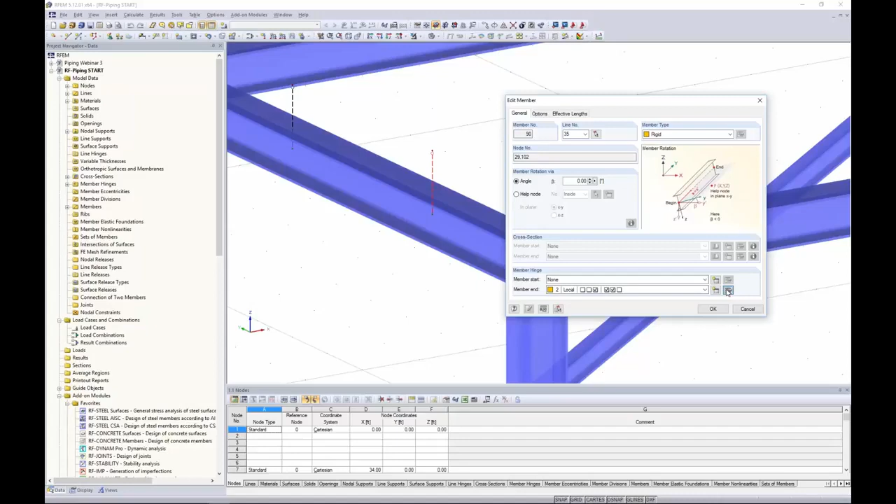What I did was add a member hinge to the rigid link here to release translation in the global X direction, so that will allow those pipes to slide back and forth in that direction. I also released the moment, since I didn't want any moment transfer between our piping members and the supporting structure, so we can do so with the member hinge on our rigid links.

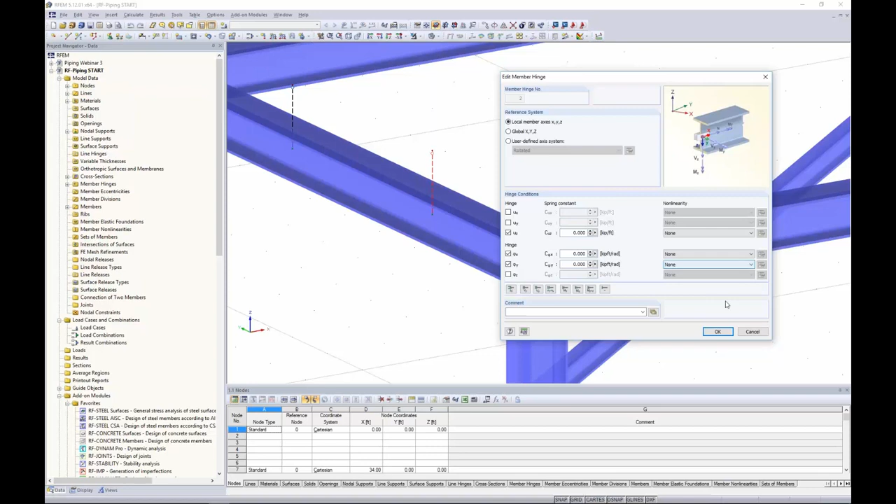Now, taking a look at the rest of the structure, these are just typical W shapes. We can use our project navigator over here on the left to view all of the input data. For example, in the cross sections tree, we can see that the W8x35s are defined for most of our members within this pipe rack. We also have some diagonal vertical bracing, W4x13s. So that's really all that I've done so far.

Now, when you go to create a new model within RFEM, or after you've created the model as I have, we need to go back into the general data. What we would do is right-click on our model name, go into the general data, and under the options tab you'll notice piping analysis. This option is only available if you've purchased the RF piping module extension. So here we will check this checkbox, and under the details are some additional settings that we need to define.

The first one is to define which standard we'd like to use. We have the ASME B31.1, 31.3, and recently added is the Euro code. This option down below, this checkbox, is for welded forged T and welded in contour inserts. This just refers to a couple of variables, RX and TC, that we won't be using today, but keep that in mind if you are using those types of components.

The default branch connection type will make a little bit more sense later on. For right now, we just want to set this to reinforced fabricated tee, but keep in mind that this setting is here, and I'll mention it later on.

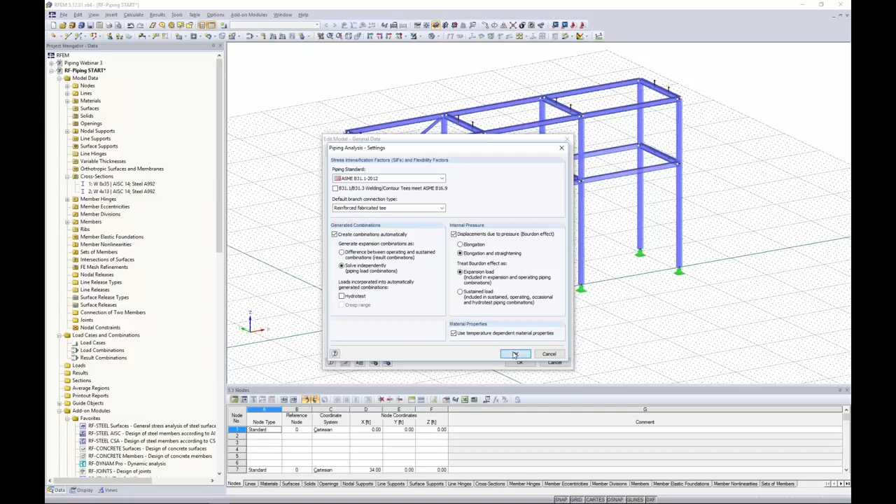When I click OK out of these dialog boxes, you'll notice I'm still within RFEM, but now I have some additional tools available to me for modeling piping systems.

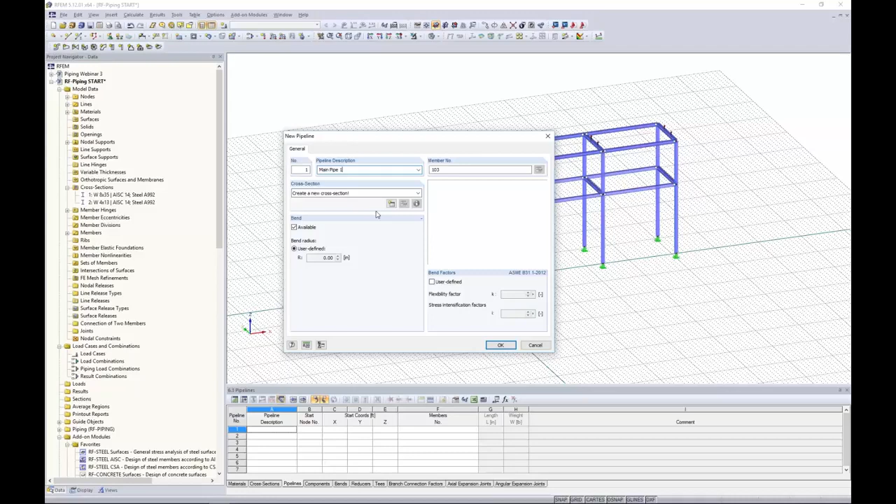We want to begin today by drawing a new pipeline, using this first tool available in our new toolbar. For the pipeline description, we'll call this one main pipe 1, and we need to define a cross section. With the cross-section, we will go into our database, and up pop several different manufacturers and standards.

You'll notice that we have the ASME B31.1. We have NPS and DN. NPS is going to be related to imperial units. DN is going to be related to metric.

For our first pipe, I want to scroll down to my 8-inch diameter, specifically 8.625, and the thickness of the wall is going to be 0.594. So I can see my cross-section populated here. If I have any questions about what variables are being used for my cross-section properties, I can open up this info box to see everything listed.

The material is also defined within the same dialog box. Here we will open up our material database. Over on the left we have some filters where we can filter down to the ASME B31.1. These are all the materials listed in Appendix A within the ASME standard, which is quite complete. For today, we will just stick with A53 grade A, and here are all my material properties.

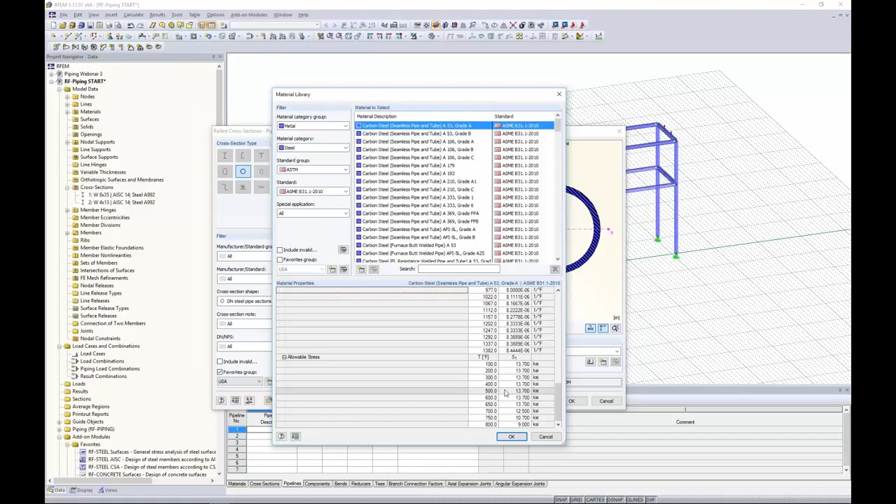This is what I mentioned previously, that as our temperatures are changing, so are our dependent properties such as modulus of elasticity, thermal expansion, and allowable stress. These will actually change with each iteration as long as the temperature continues to change as well.

Now that we have fully defined our cross-section and our material, both listed in that dialog box we were previously in, the line mass here is nothing more than the density of our material multiplied by the cross-sectional area of our pipe to give us our mass per unit length. The total line mass is correlated here with the line mass we've defined so far, but you'll see this begins to change as we define some additional parameters with these other tabs up here at the top.

Design data is important because it relates to our pipe wall thickness checks and pressure checks according to the ASME later on. So we want to initially give some design data here that we plan to design this pipe to. For example, if we plan to use a pressure no greater than 500 psi, and maybe design around 85 degrees Fahrenheit, nothing too hot or extreme here.

The second tab is the bend. You can actually create a different cross-section for the bend of the pipeline than the straight pipe. This is important for things like thermal temperatures, which create much higher stresses at a bend. So if we wanted to change this cross-section to a thicker wall, we can do so. The rest of these parameters line up with what we saw in the straight pipe tab.

Layers. We can include layers such as insulation, plating, and lining. For today, we'll stick with applying an insulation. What we'd want to do here is to define the weight of the insulation as 6.37 pounds per cubic foot, as well as the thickness. So we'll add 2 inches of insulation to the outside of this particular cross section.

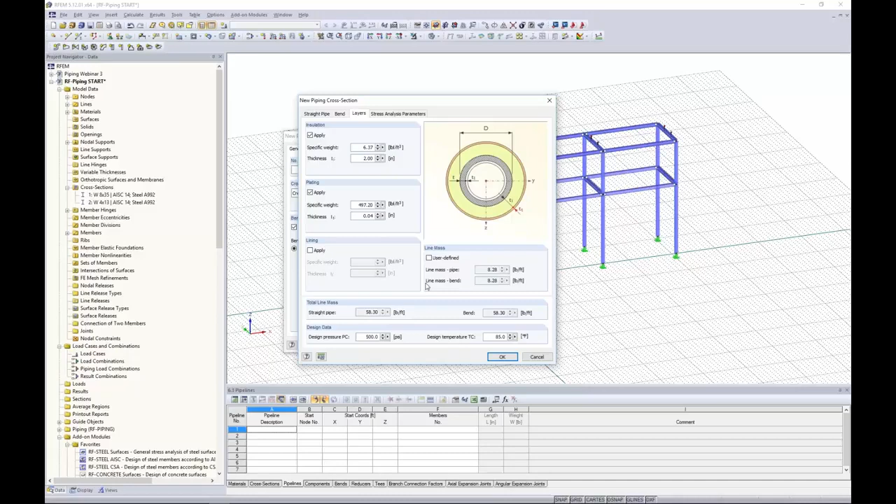We'll also add some plating. For this, the specific weight needs to be quite a bit higher at 497.2, just something that we're given from the manufacturer, and a thickness of 0.04 inches. Now you'll start to see this total line mass increase from what we saw with the first tab.

Stress analysis parameters, well, here you can see there's corrosion allowances, mill tolerances, manufacturing allowances, and welding factors. This is important for when we're checking the pipe wall thickness according to the ASME. There are some default settings in here, but by all means, you have control to override those for both the straight pipe and the bend.

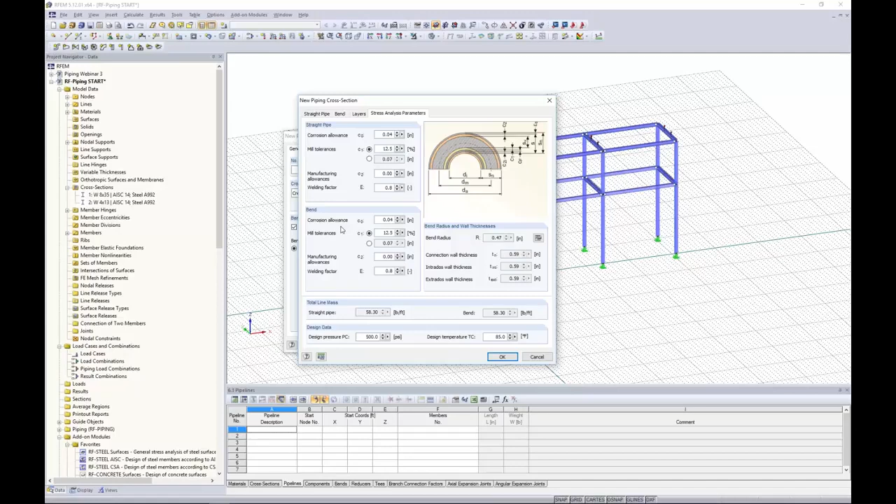Now I can click OK, so we're back to our original dialog box. So we define all the properties for our cross section. Now you'll also notice that we have bend available here. What this means is that as I begin to draw my pipeline back here in RFEM, I can actually automatically create the geometry for the bends.

So right now we have it set to the long radius. The bend radius is set to 12 inches. We can change this to short and use 8 inches, or we can choose a user-defined radius here.

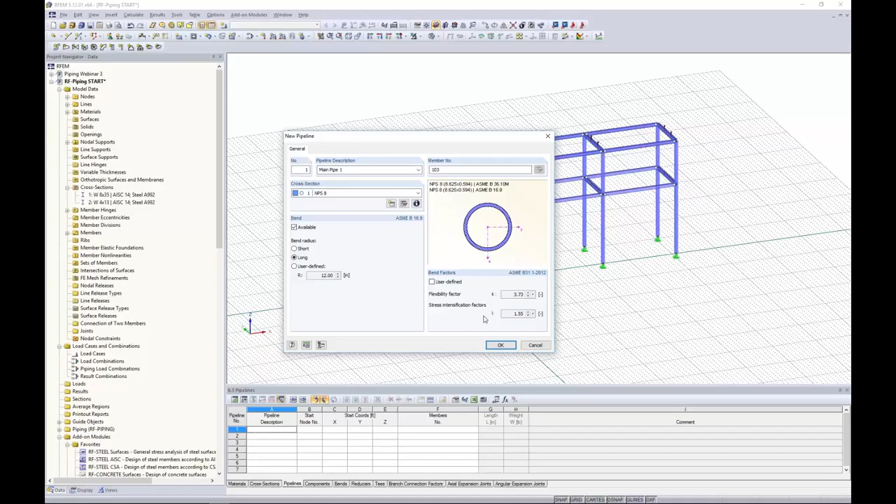The bend factors are calculated from the ASME. The flexibility factor has influence on the bending stiffness of the pipe bend. The stress intensification factor is something that will be used for design later on in our add-on module RF piping design. Again, you can override these with user defined as well.

So now that we have defined everything for our first piping member, what we want to do is to begin drawing it. You'll notice I have these crosshairs available in my graphical interface. What I'd like to do initially is to change the drawing grid around a little bit. So I'm first going to change the plane, and then I can easily select a different origin here. I'm going to snap to the top of this rigid link here.

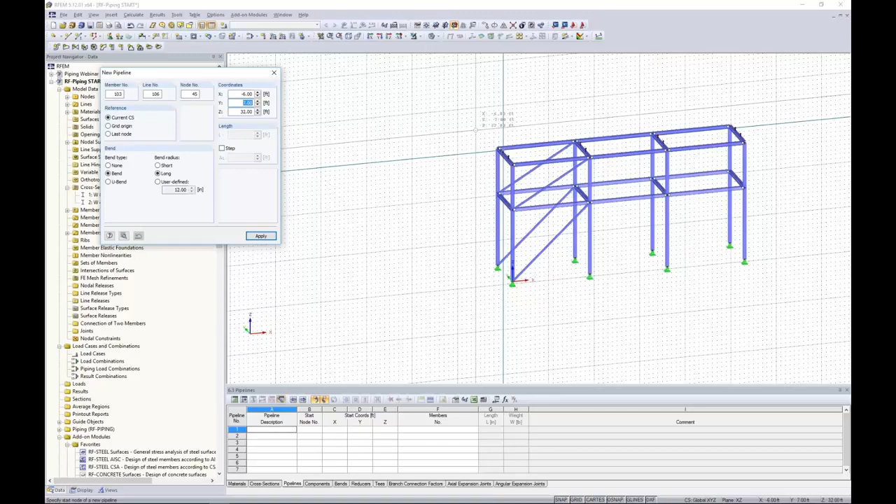So when I go to draw a pipeline, I have a few options. I can choose the current coordinate system, which is what I'm going to do. That will just leave this grid as it is. I can also choose a grid origin or the last node. The last node will dynamically change according to the clicks I make in my model as I begin to draw this pipeline.

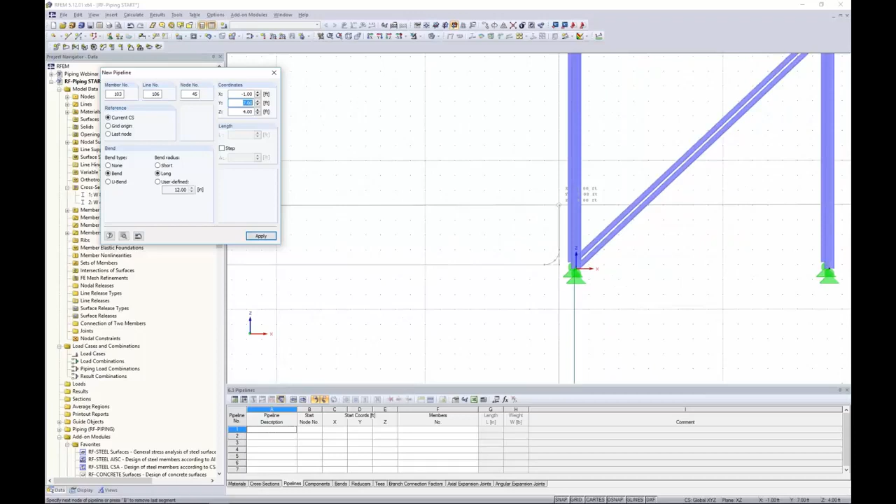So we go all the way up to the top, and we can begin drawing the pipe across the top of the supporting structure. Now, keep in mind that this drawing grid keeps me in one plane, so I don't have to worry about flying off into space anywhere.

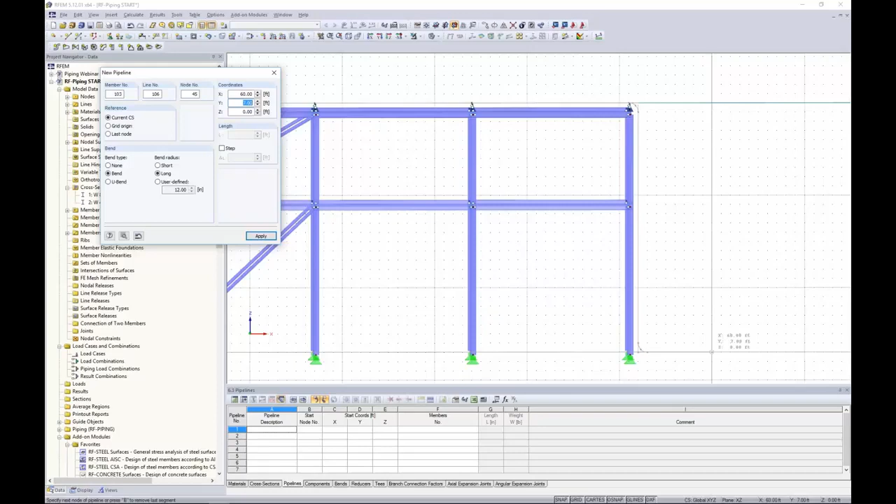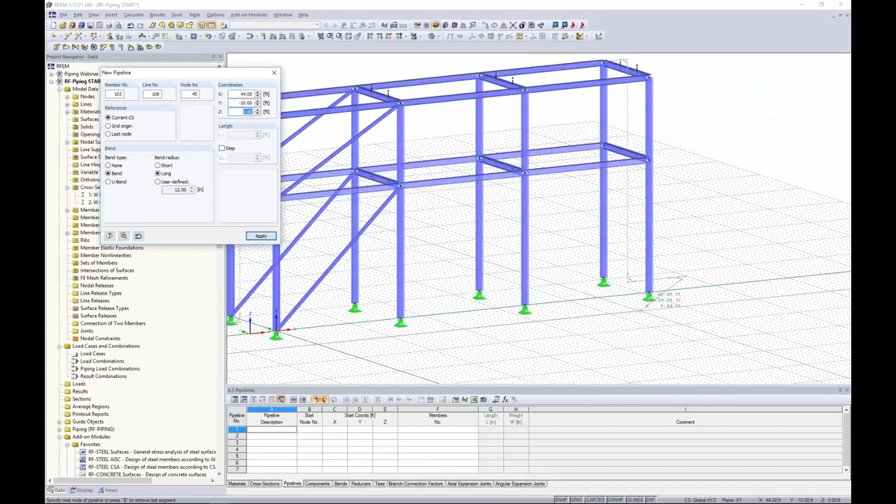Now, when we get to this point over here, what I'd like to take into account is maybe some additional bends to dissipate my heat from my temperature loads. So all while I'm still drawing this same pipeline, I can change my drawing grid back to the XY plane. Maybe I snap back to the bottom of my supporting structure. Then I can zoom in and continue modeling my pipeline here with some additional bends.

So once we are done with this, I will make my last final click here, and we'll snap to a point and right click to finish it. And now my piping is complete. So you can see that if everything goes well, you should have the name of your pipe here called main pipe 1. That's the description that we gave it.

Now I want to create an adjacent pipe right next to it, and utilizing some of the features within RFEM to make our life a little bit easier, what I'm going to do is to turn this into a wireframe display model. Now I'm going to highlight my important nodes here, the nodes where the bends occur, by holding down my control key and selecting all of these main nodes where the pipe makes some bends.

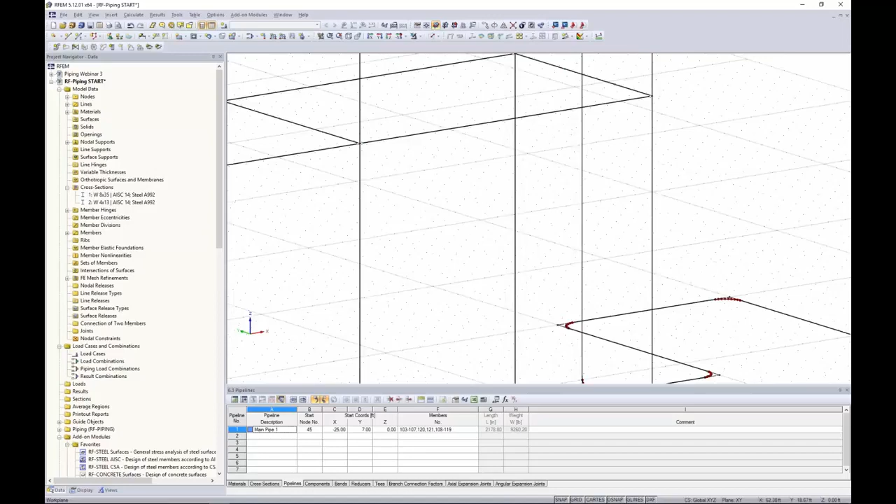So once I have these selected, what I can do is use my Move Copy tool. I'll create one copy and move it -4 feet in the global Y direction. I click OK, and now you'll see those copied nodes are available here.

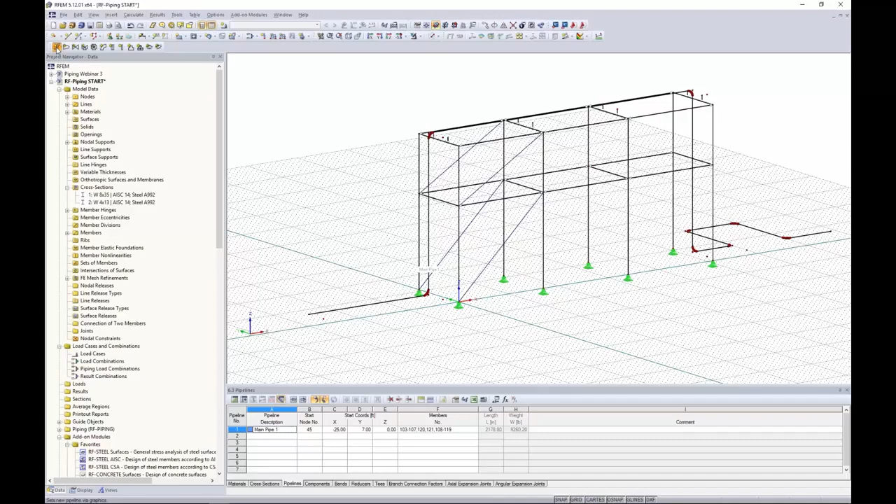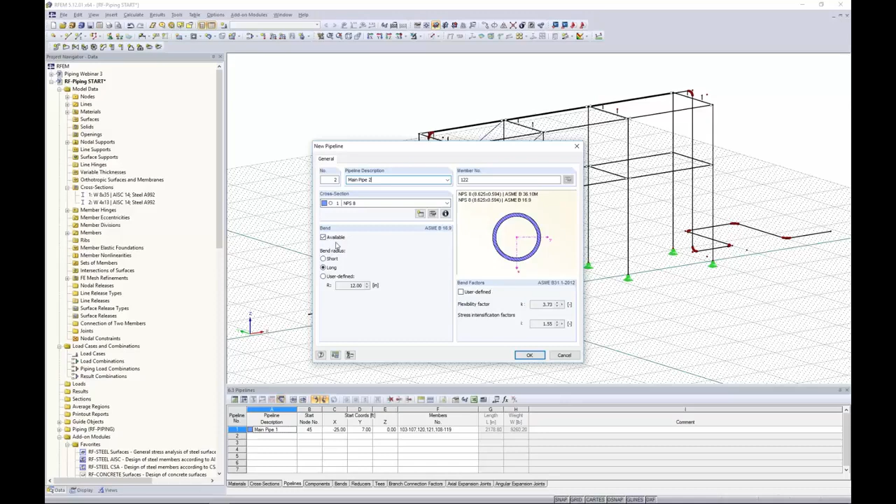Nothing too special. So what I'm going to do is create a new pipeline, and once again, this time we'll call it main pipe 2. Now the cross section, I've already defined that 8-inch diameter pipe with all the insulation and cladding. That's now available for all my pipelines to use in this model, so I want to use that same cross section so I don't need to redefine anything. I'll use the same bend as well, and I can click OK.

So the reason that I created those nodes now is that I can easily just snap to those nodes here without having to change around my work plane like what I did previously. So again, just using some of those special features that we have in RFEM to make modeling a little bit quicker, and I right-click to make my last point.

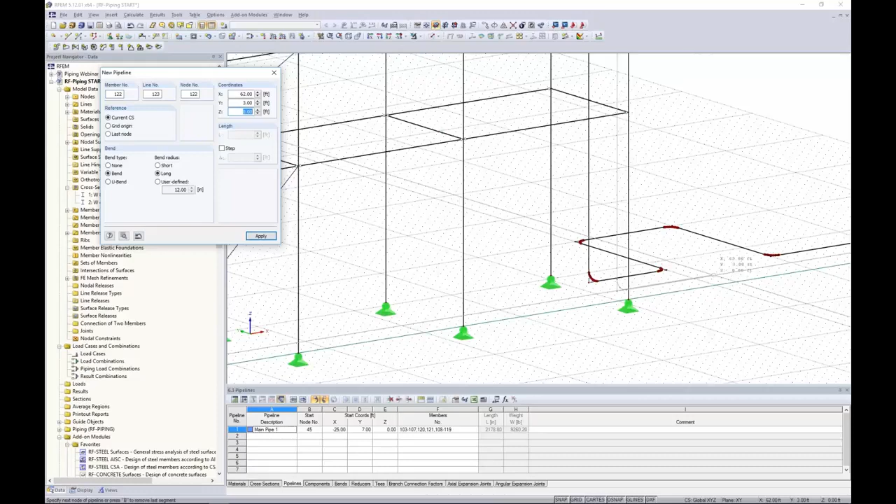Now, if I turn this back into rendered view, let's say, oh okay, well this pipe really would like to extend out a little bit further than what I have shown. Well, instead of redrawing everything, what I can do is take this node and simply drag and drop it so that it's adjacent to my main pipe 1. And again, everything went well.

We see the name of main pipe 2 here. Now the pipes are kind of blending into the rest of the structure, don't really tell what's going on here. Well, under the Display tab in the Project Navigator, this controls everything that we view graphically, whether that's input data or our results we'll see a little bit later on. But if I scroll all the way to the bottom, I have this option here to change my colors and my graphic according to, right now it's just set to the standard.

We can choose material, cross-section, but we also have pipelines. So when I choose that option, my panel pops up and shows me exactly what my main pipe 1 and main pipe 2 are with different colors, so it sets them apart from the rest of the supporting structure.

Okay, so what I'd like to continue to do is draw in a couple of straight pipe members, just short segments that frame into this main pipe 1 so we have some intersections. I'm going to go back to new pipeline, and we'll just call this one pipe 1.

And I want to define a new cross-section here. So up pops our cross-section database. Now, you'll notice that, of course, we can go back in and filter through this long list. We also can create a favorites group. By activating my favorites group, I've edited it so that I've just added the 2 cross-sections that I'm using in today's webinar. But you can imagine that if you use a handful of cross-sections quite often, this is a great way to just quickly select them.

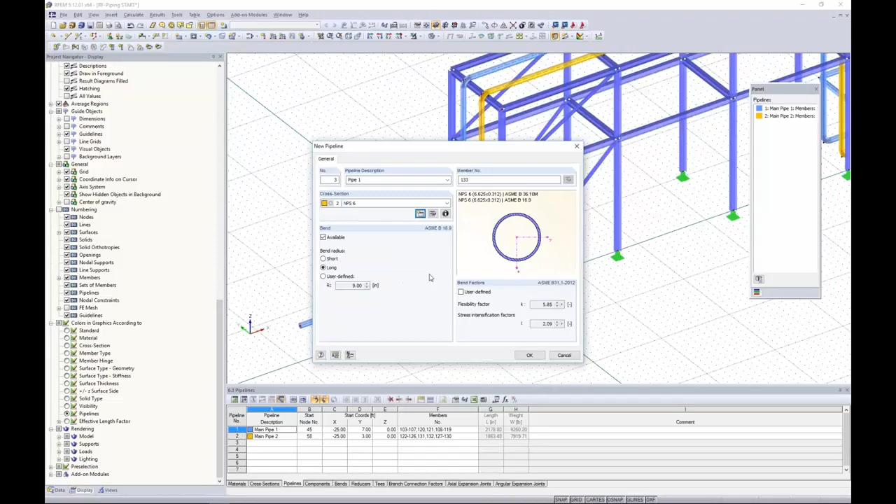So I click OK once more, and I think easiest is to change this to my current coordinate system and to change this to wireframe view. So that way I can zoom in here, and my first point I'd like to choose is -1570. And then all I need to do is snap to a point which extends out. I right click. That's my first pipe.

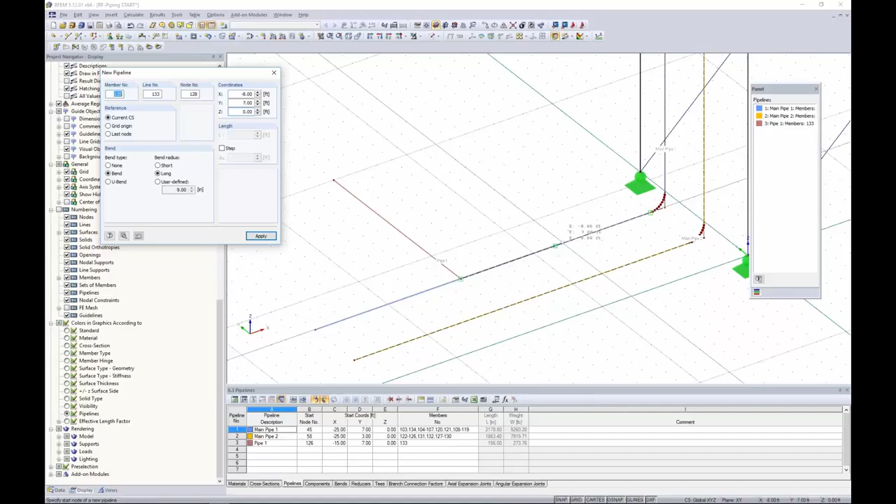Creating once more a new pipeline, we'll call this one pipe 2. I've defined that smaller section, so I always have that available in this particular model. I click OK, and then I can again change this to current coordinate system, that's what I prefer to work with. Here we'll choose -870 and snap to a point out here, right click.

Showing the rendered view, we now see those additional pipe sections shown here, and everything is colored differently so we can tell it apart. Okay, so now that I have modeled my pipelines, let's move on to the piping components. That was where the rest of these tools will come into play.

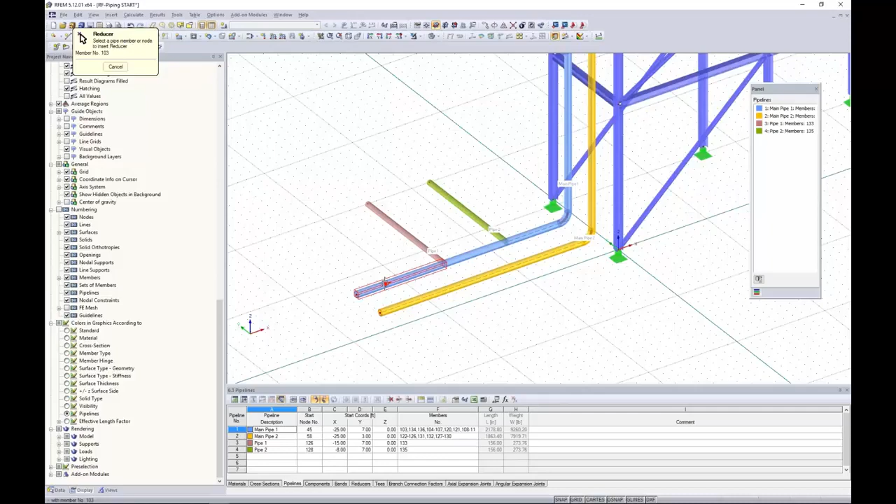So the first thing that we want to define is a new reducer. So when I click on new reducer, the program requires me to click on the pipe that I'm going to apply this reducer to. So I click on this first pipe section here. Now reducers are used to transition from a larger pipe to a smaller pipe or vice versa.

Within this dialog box, the first thing I need to define is which dimension to change, towards which node. This is actually the opposite of what I want to do right now, so I'll click on my beginning node here. You'll notice my reducer start, I can choose that smaller cross section we've already defined, or create a new section.

The reducer end is grayed out because this will transition into the pipe I already have defined. What I do need to define is where this reducer starts, so we'll start at about 48 inches from the start, and you'll notice this big red arrow pops up exactly on the pipe where we're going to apply this reducer.

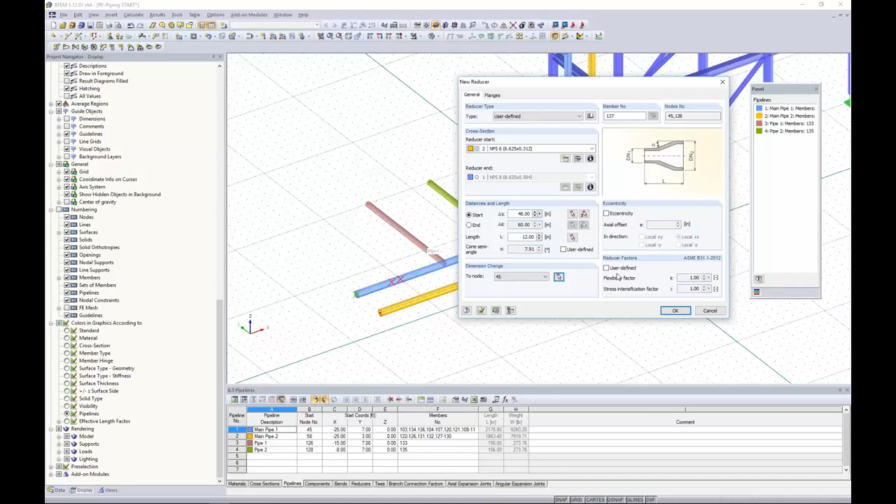The length can also be applied at 12 inches, and there's our second red arrow showing where the reducer end is. You can also define an eccentricity here, which would be useful if you want the bottom of the pipes to be flush. In our case it doesn't matter, so we'll keep this as is. Again, the reducer factors can be overwritten here if you'd like.

For a lot of these components we do have a library, but unfortunately this library is more relevant to Eurocodes and European manufacturers. We plan to implement some US manufacturers in the near future, but for now it's easy enough to just set this as user defined. For flanges, this is where maybe we would weld flanges to our pipe and bolt them together at this reducer location. I'm not going to apply flanges now, but we'll do this plenty more times with other components today, so that'll be more clear in a minute.

And I click OK. Now if we zoom in, we can automatically see that reducer applied here with the smaller pipe section on the left.

Moving on down our list here, we have three options for valves: a two-way valve, a three-way valve, and a four-way valve. Pretty self-explanatory - a two-way valve is used for two pipes connecting together, a three-way valve would be an intersection of three pipes, and a four-way valve of four pipes.

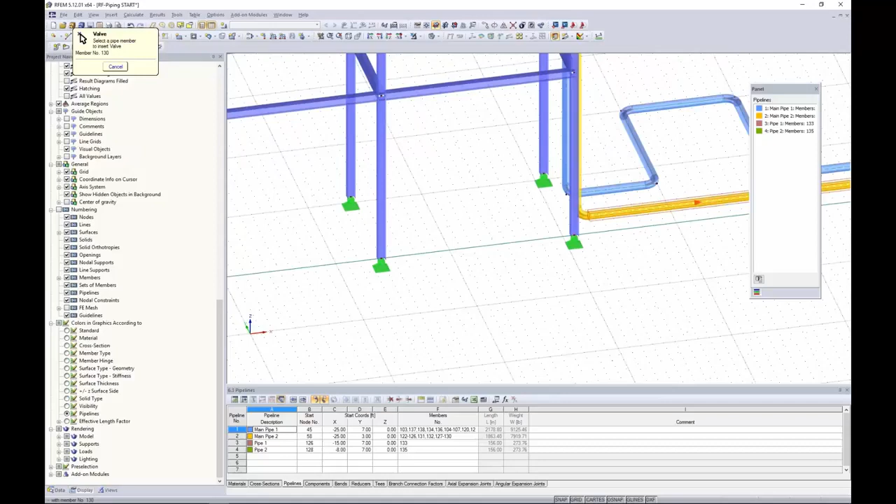Starting off with our new valve, just two-way, we're going to move to the other side of our model, in particular main pipe 2, and select this pipe here. Up pops our dialog box for a new valve. We just want to specify where this begins, so we'll start at 12 inches from the member start, indicated by my red arrow here.

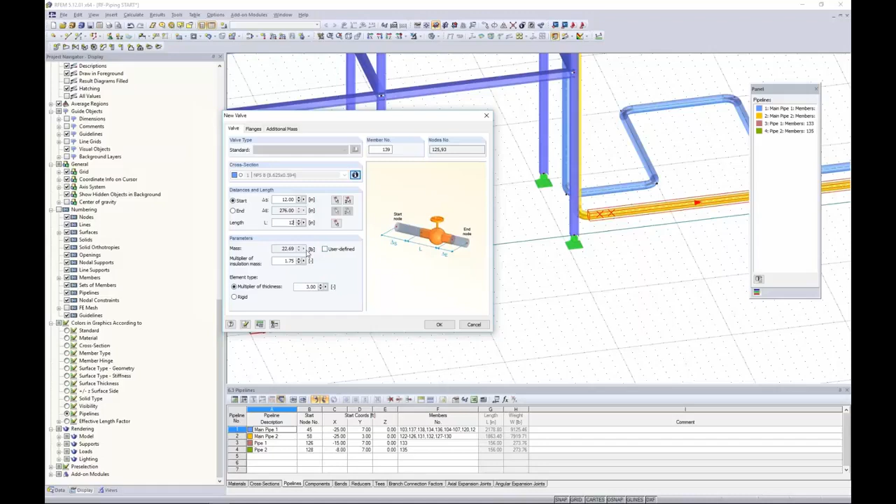The length will be 12 inches, and we have some parameters here automatically created, such as the multiplier of the insulation mass set to 1.75, and the multiplier of thickness set to 3. You can override those, which ultimately affects our mass here, or you can set a user-defined mass as well.

The flanges - this is where maybe I do want to apply some flanges. We're going to plan to weld those flanges to both the valve and the pipes and bolt them together. For our flanges, we want to check the checkbox that those are both available.

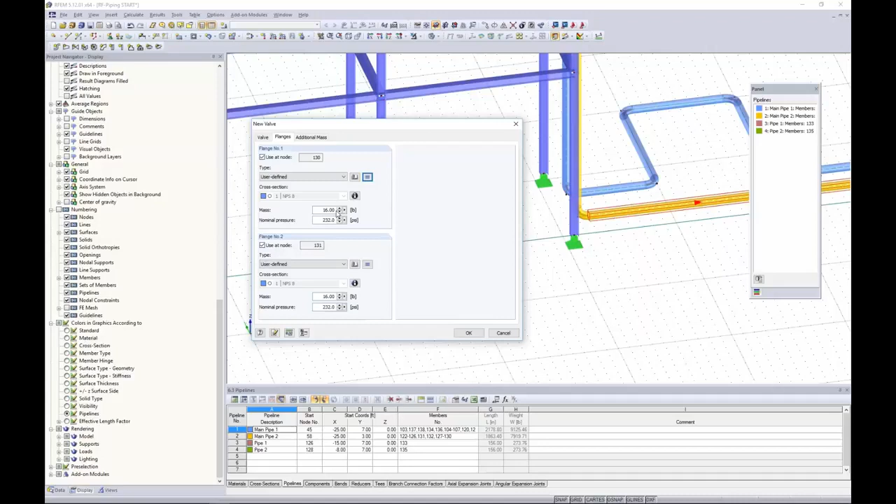Our nodes are automatically generated here of where that flange is going to occur, and we can simply define the mass here of our flange as 16 pounds, and maybe the nominal pressure is 232 - again, this is just information we'd get from a manufacturer. What's also nice is I don't have to re-enter this information, but I can just set it to all. This will automatically populate the same flange settings for my other node.

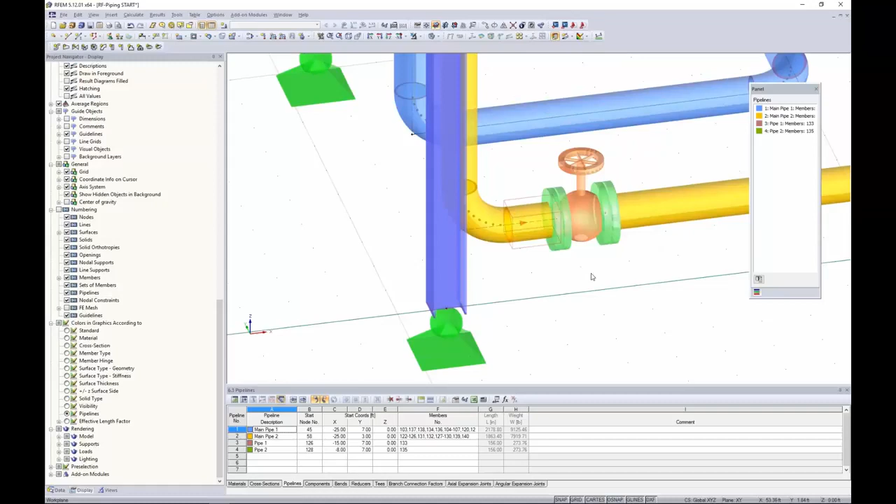The additional mass tab here is useful for our hand wheel if we have additional mass to take into consideration, as well as the eccentricity away from the original flange. Once I click OK, we can see that flange is automatically created visually here and will be taken into account for stiffness, analysis, and design. So that makes sense for our two-way valve.

Now in a similar sense, we will apply a three-way valve. Instead of selecting a pipe, we have to select an intersection, so I select this first intersection here where we have pipe 1 framing into main pipe 1. The cross sections are automatically generated according to what we've modeled in RFEM, and we want to give it a length for all three piping components here, 12 inches.

Again, our red X indicates where that occurs. Parameters, same thing that we saw within the two-way valve. We have a multiplier of insulation mass, multiplier of thickness. Our flanges here, we do want to create flanges at all locations.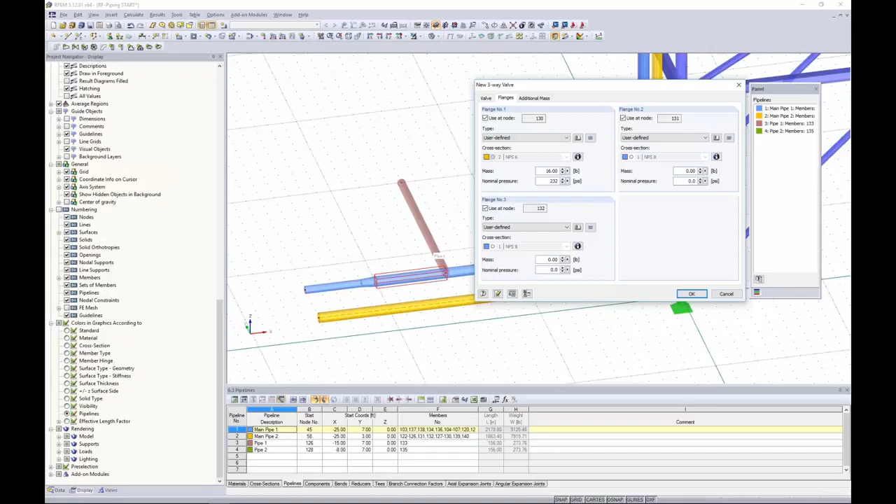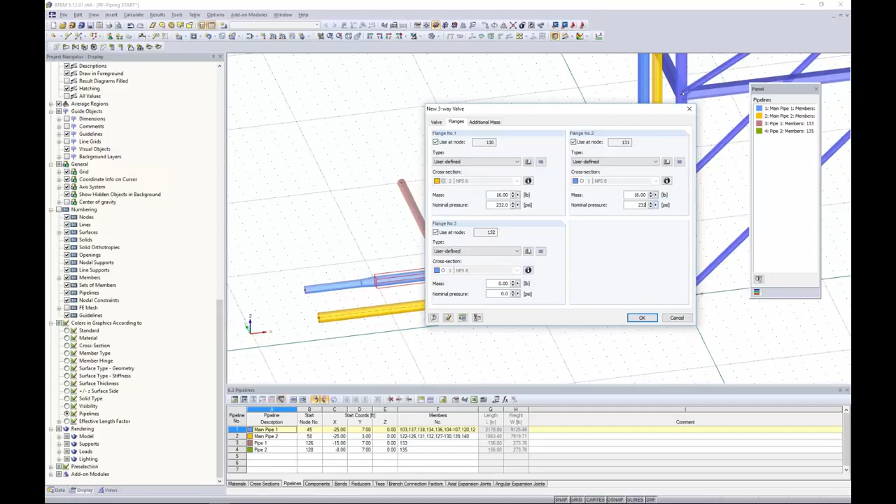Again, this will be 16 pounds, 232 psi. Now, if I try and set this to all, you'll notice that nothing happens for my other two flange entries. The reason why is because we have a different cross-section defined here. The program will only automatically assign the flanges to the same cross sections. So if I move over to my 8-inch diameter pipe and I type in 16 pounds and 232 psi, and I click equals, that will set the flange for the third node automatically.

And again, the additional mass can be considered with the hand wheel here. So once I click OK, then we should see that three-way valve generated graphically. So that's what a three-way intersection would look like.

Now, four-way intersection, same concept. We don't have any intersections of 4 pipes here, so we won't be applying that today.

Right next to that is the new bend. A new bend is useful had I not created to automatically create the bends when I drew in my pipeline. So perhaps these two elements here, these two pipes connected at a 90-degree angle, and I wanted to go back in afterwards to create that bend. You can always do so with the bend tool up here, define the radius, define a different cross section if you'd like as well.

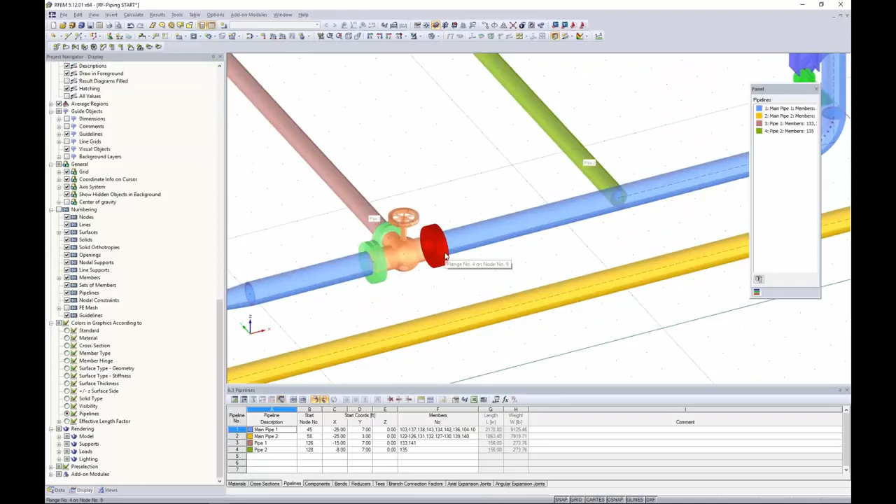Next to that is a new flange. So this has nothing to do with some of these other components, but you can purely apply just a flange to any segment of a pipe. This might be useful if you have 2 extremely long pipes and you would like to add in a break there and they're bolted together with a flange. You can do so by adding in that flange.

We also have a new blind flange. This would be able to block nozzles and piping ends. So for example, we could add a blind flange here at one of our piping ends.

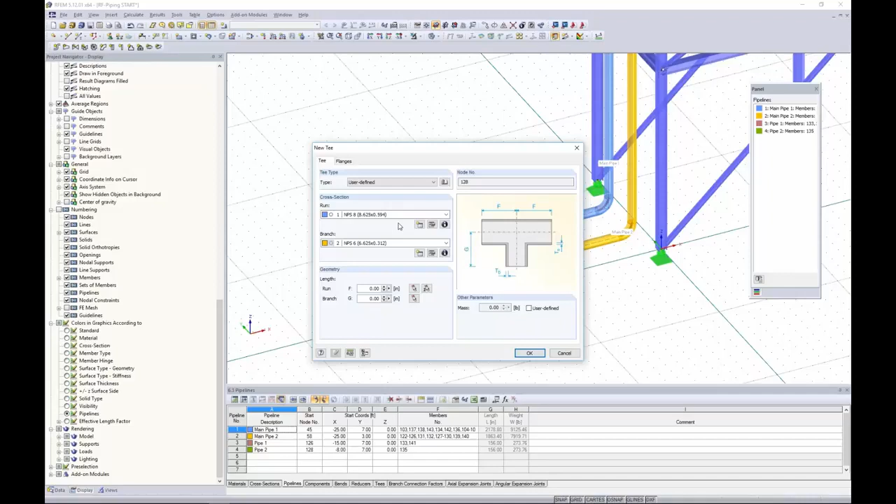A new T. So a new T would be an intersection of 3 pipes, such as what we see here with our pipe number 2. Nothing too fancy with this. We have the cross section defined with the run. The program automatically assumes that's our 8-inch pipe, and the branch is going to be the smaller 6-inch pipe. Then we just simply define the geometry, and again, we can add flanges here.

For our case, instead of doing this, I'm actually going to apply a new branch connection. So again, I click this intersection. Now with the branch connection, remember back in the general data, I said that we had to set a default option for the connection type. Well, that's where this comes into play. So we set the reinforced fabricated T so that automatically when I jump into this dialog box, this is what will always be automated.

Now, if I use something else quite often, then you probably want to go back to the general data and change that default value. You can always come in and individually select them as well. So for us, we're going to choose a reinforced fabricated T.

All of our cross-section dimensions and factors are automatically calculated here, but what we do need to define is the thickness of our reinforcing pad or saddle thickness. So this is important to just give the pipes some additional reinforcement here or thickness at maybe where we have some high stress locations. For today, maybe we put in here a 1/4 inch thick saddle thickness and weld that directly to our pipes. Once that's done, I click OK.

Now this is indicated graphically with just a ball at that intersection. As far as the other 2 options here for axial expansion joints and angular expansion joints, I will get into that later after we do design. So for now, we'll continue to move on.

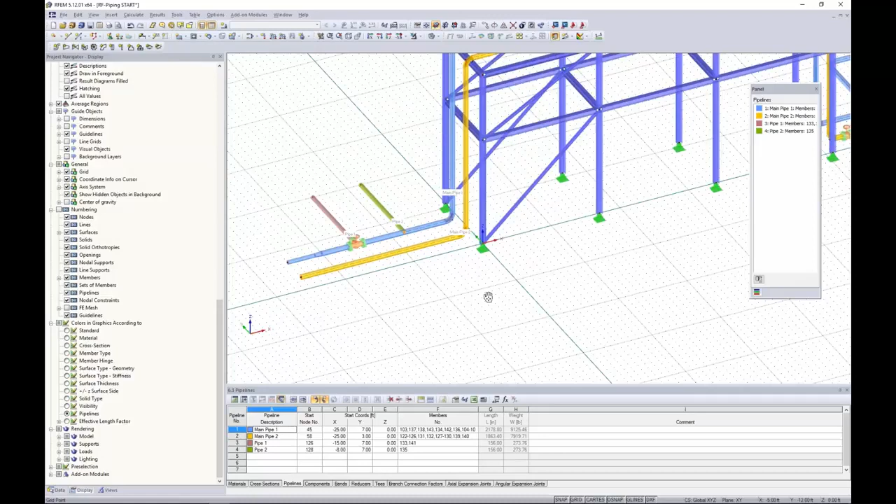So before we can start loading our structure, we need to support it. Just like we support before we begin loading our piping members, we need to support them. So just like we supported our supporting structure here, you can see at the bottom of the columns we have nodal supports. We have to do the exact same thing to our pipe elements. So we don't have any additional features for supporting the pipes. It's just what you would use in RFEM for all the rest of your members as well.

So in our case, we want to create a new nodal support. Now with a nodal support, we have 6 degrees of freedom, 3 degrees in translation, 3 degrees in rotation that we can fully fix or fully release.

We also have a spring constant here. So if you have something that's not fully fixed, not fully released, but somewhere in the middle, you can define a spring constant and you'll have partial fixity.

Lastly, we can define nonlinearities. It's not completely uncommon that for a piping support, you have some type of friction support, dependent on your normal forces. You can define all that with the nonlinear capabilities within the program. I'll repeat this again, but nonlinear supports is something that cannot be taken into account with result combination, so just keep that in mind, but we'll revisit that later.

So for today, we want to use just a typical hinge type application, one of the default options within the program. I click OK. So what I'm going to do here is simply click at the ends of my pipes to support those with that basic nodal support.

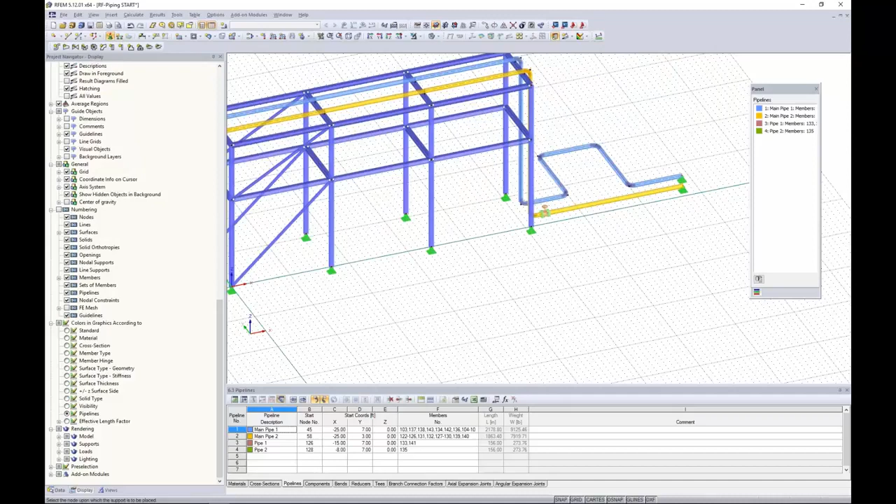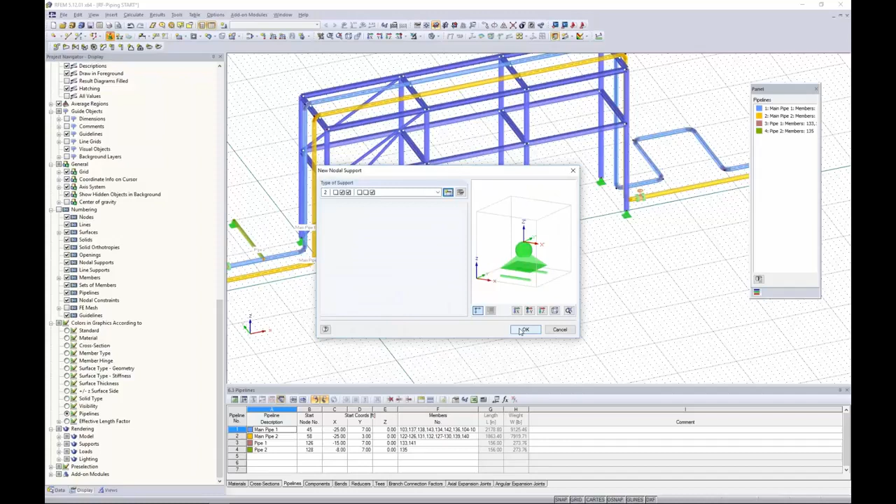In a similar concept, going back to my nodal supports, I'd like to define a new definition. This time I want to fully release it in the X direction, some type of roller support that allows translation in the global X direction. I click OK. So now for this type of support, I'm going to turn this into wireframe view, and I'm going to zoom in here.

These will want to be applied right at the bends of the pipes. Now, I'm not applying it at this node, which kind of indicates where our bend occurs, because this node doesn't technically lie on the piping member. We need to apply it directly on the pipe.

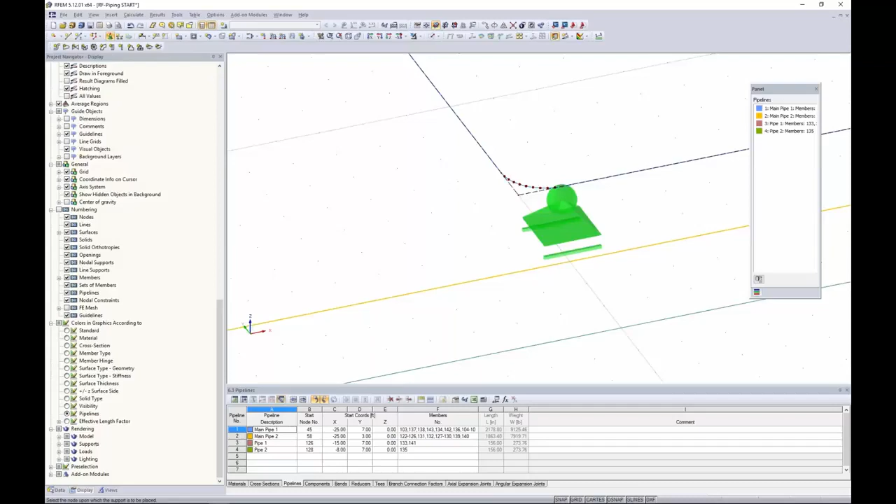So for this, I'm just going to highlight these nodes right at the bends on both sides. And once we've completed the right side of the structure, we'll zoom in to do this on the left side.

Now, once more going back into the nodal support, because I've defined these new nodal supports, I can always select them within my drop-down box here, but I want to create one more definition, and we're going to release this in the global Y direction. So this will allow movement in the global Y as a roller support.

I click OK, and that's where we want to apply this to our pipes up here where we added in these additional bends. Okay, so now our structure, including our pipes, are fully supported.

What I'd like to move on now is loading of the member. So for this, we want to create some additional load cases. I go to add a new load case, and up pops my load cases and combinations dialog box.

Now, for those of us who are familiar with RFEM or just structural design in general, we of course have action categories according to ASCE 7 or the NBC, such as live load, dead load, wind load, and so forth. But when you have the RF piping module activated, you'll notice we have several more action categories available here for our piping load combinations, such as piping self-weight, fluid, pressure, snow, wind, even cold springing, hanger, hot loads, and cold loads.

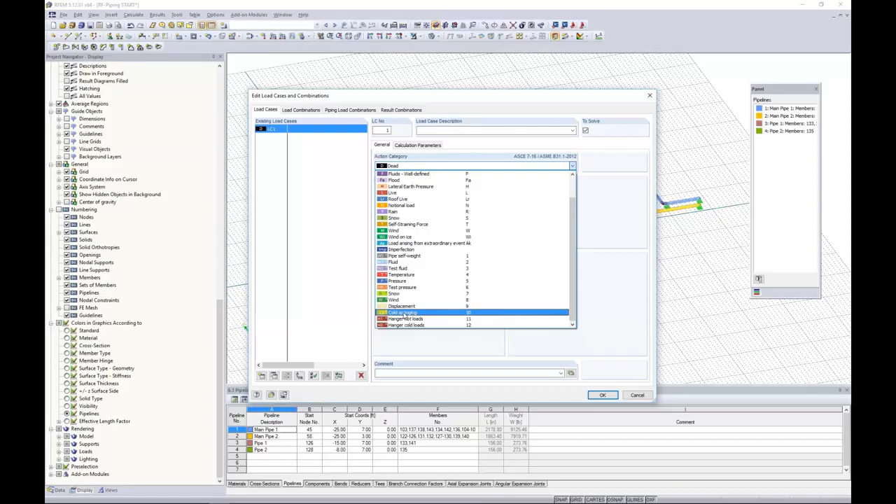So for our first load case, we will define a pipe self-weight. We'll give it the name pipe self-weight. The self-weight will be activated here with this checkbox as -1 in the global Z direction.

Now we create a new load case. We uncheck the self-weight because we don't want to account for that twice. This one will be for fluid, and we'll call this one pipe fluid. We create another load case.

This time we will name this one temperature 1 and assign the appropriate action category. I can make a copy of these as well. So now all I need to do is redefine temp 1 to temp 2, creating another load case such as pressure, and we'll call this one pressure 1. Making a copy, we'll call this one pressure 2.

So now all of our load cases are complete. I've applied no loads, but I've just defined the load cases that eventually those applied loads will fit into. So now I want to take a look at my piping load combination.

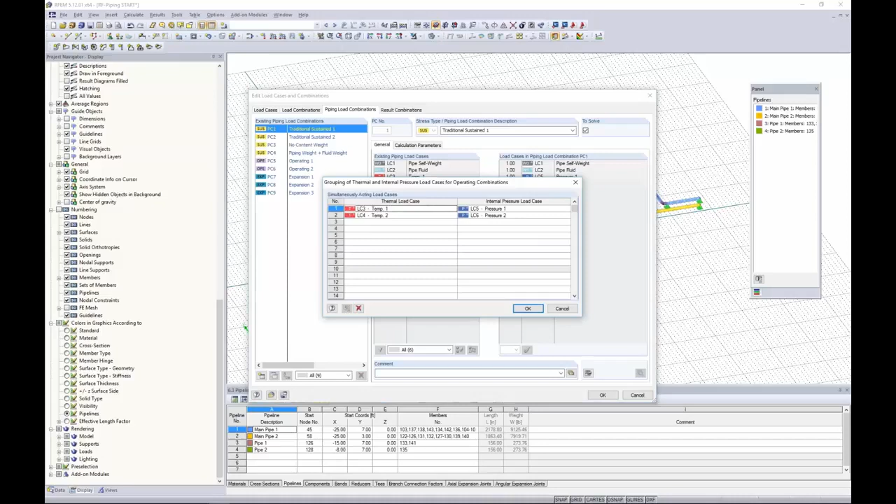So when I try to click another tab, I automatically get this RFEM question. It tells me the load cases were changed. Not all internal pressure load cases have been assigned to corresponding thermal load cases. Do I want to do this now? Yes, I do. So now up pops an additional dialog box, which simply assigns my temperature load cases to my pressure load cases.

Now the program makes some assumptions here, but if I don't like these assumptions, I can always use my drop-down to make changes, or I can add in some different combinations here. So that's important for our load combinations.

Under the piping load combinations, we see some automatically generated load combinations, such as for sustained, for operating, and for expansion. These are the various stress types, and they are incredibly important because this tells the program, once we get into design later on, exactly what load combinations to use in each particular section of the ASME code for our stress checks.

Now, had I chosen to create these load combinations manually, I still need to assign a stress type. Again, it's important for our ASME code design later on.

When we take a look at the sustained case, we see self-weight, pipe fluid, pressure, maybe no content weight is just the self-weight. We also have the operating case, which is all 4 load cases acting at once.

Now we get into the expansion load cases, and this is something very important that relies on our settings and our general data. Remember how I said we're not going to create result combinations, but rather only load combinations? Well, this has to do with these expansion loads.

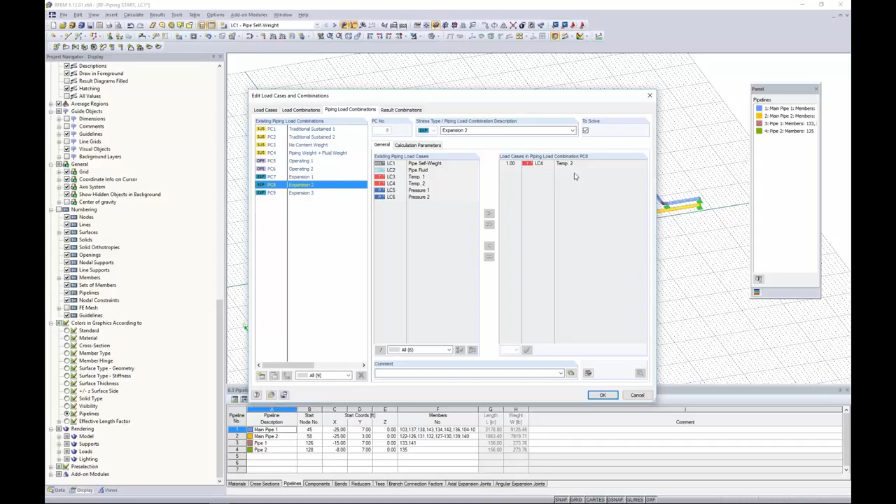So when I take a look at these expansion loads, they are nothing more than just the temperature loads applied. So then I'll be doing my expansion stress checks within the ASME according to simply this temperature load applied.

What I'd like to show you is if we go back to the General Data tab, under the data, we scroll up to our name, right-click under General Data to go right back into where we started. Here I'm going to quickly change this to result combination.

Now remember, material nonlinearities cannot be taken into account accurately, so you'd probably want to uncheck this if we're using result combinations. And I can click OK.

So going back into my load cases and combinations, looking at my piping load combinations, you'll notice my expansion loads are now gone. Those load combinations are not being generated here, but rather they're now under the result combinations. So how is this different? Well, it's still called the same expansion 1, 2, and 3.

But now when I look at the details of this, what's happening is I'm taking my load combination PC5, which is my operating 1 load, and I am subtracting out, indicated by this -1 sign, PC1, which is my load combination for traditional sustained.

So to make this a little more clear about what's going on, let's go back to our piping load combination. We're taking PC5, which is all 4 load cases applied at once. We're going to get the stresses and everything from this. Then we're going to subtract out the internal forces and in turn the stresses generated from this traditional sustained, which you'll see is all 3 load cases, but temperature is not included. So all we're left with is just the stress generated from the temperature.

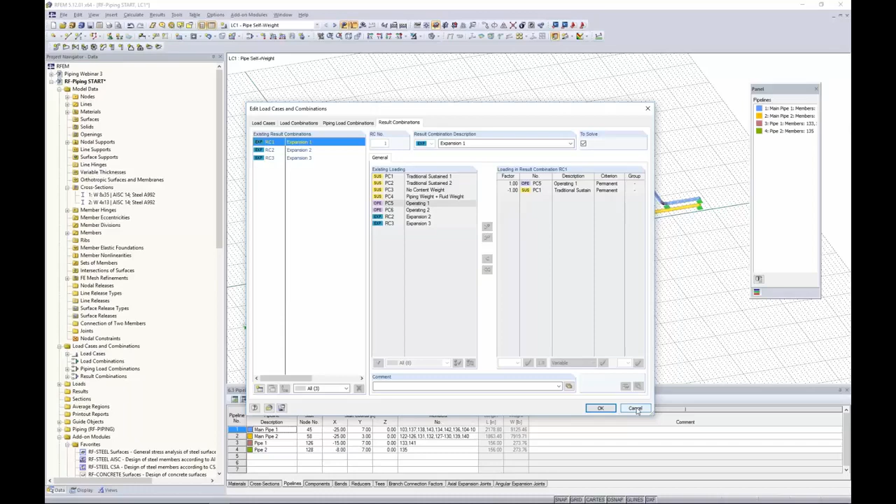So for today, what I'm going to do is go back into my general data. I'm going to change this back to solving independently because I am using my temperature dependent material properties.

Okay, so now that we have these load cases defined, you'll find those in our drop-down box available up here in our toolbar. We want to begin loading the pipes. So we'll start off with pipe self-weight, we'll just leave this as is. We won't apply any additional loads.

Now the piping fluid. What I'd like to do is select all my members to apply the piping fluid to. Right now it's kind of confusing with my supporting structure. Under the Views tab, we have some generated views that the program creates as we began to model. One of those options is the pipelines tree here.

So what I can do is check this checkbox, and now my supporting structure I can no longer select - it's not visible. What I can do is make changes and select all of my pipelines. So that's a useful feature, this Views tab, if you're looking to highlight various options within your model.

So I'm going to highlight all of my members here and apply a new member load. Member load is exactly what you think - we can apply a force along a member, but for this application with our pipes, we want to go under Extra, where we have the option for pipe content full. This assumes the pipe has all of the fluid contained fully - it's completely full, and all we need to do is give it a specific weight.

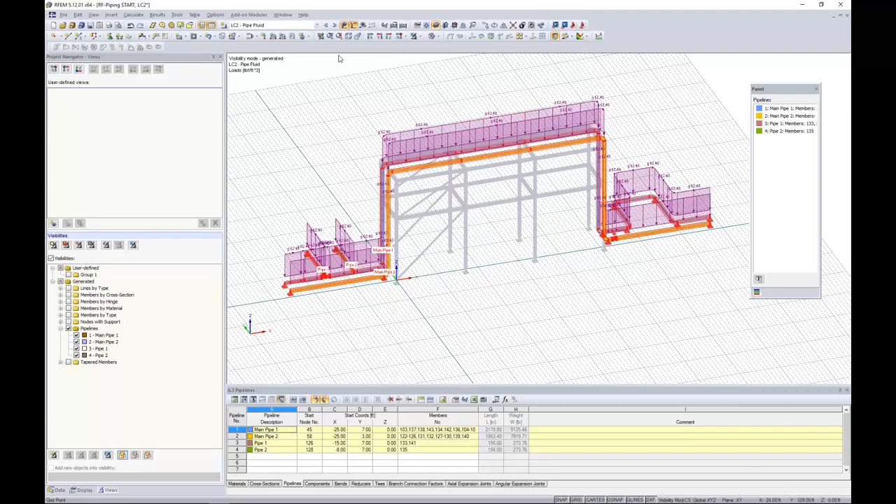Now I changed my load case at the top to temperature. My members are still highlighted, so we go back into New Member Load and apply a temperature - here we specify perhaps 65 degrees Fahrenheit. Nothing too special. I click OK, and graphically we can see this temperature load applied to all of our pipes.

Moving on to Temperature 2, same concept - the program remembers my settings from last time, so all I do is change this to 85 degrees. Again, nothing too extreme with our temperatures for this example today.

Pressure, again a member load - under Extra we have the option for pipe internal pressure. Here you can see an outward force acting from the interior of our pipe, and we just need to define a magnitude. This first pressure will be 145 psi. I click OK, and just like before, I can see that 145 psi applied to all of my members. Lastly, one more load for Pressure 2, just changing the magnitude here to 218 psi, and I click OK.

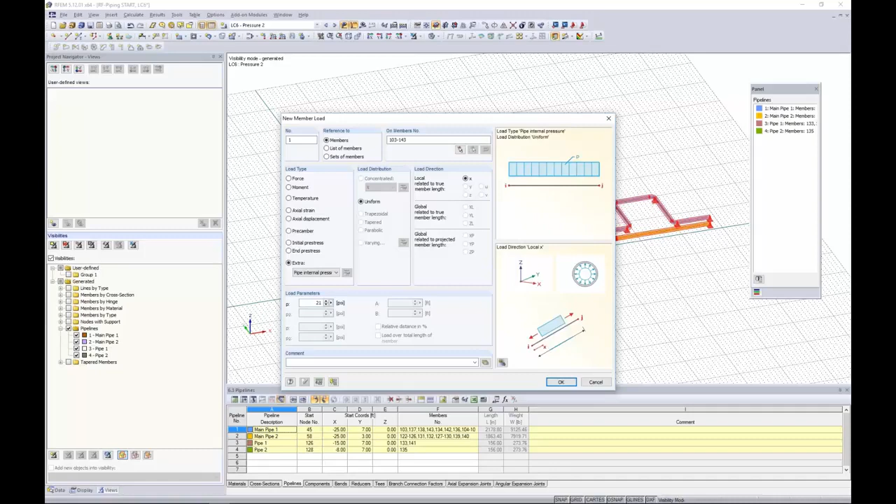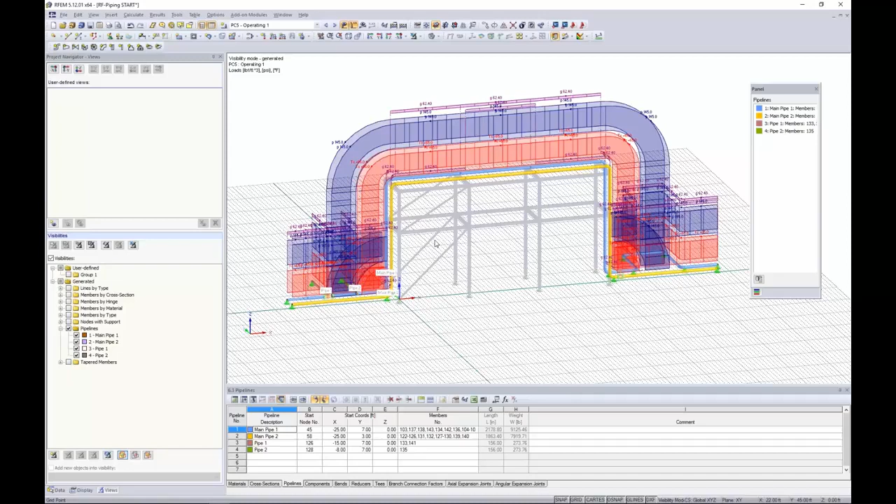So now these loads are done, but what's nice is that not only can I scroll through my load cases, but I can also take a look at some of my load combinations. For example, Operating - this is with all 4 load cases acting at once. So I can see those loads stacked on top of one another and exactly how they're going to be applied visually to my particular members.

Okay, so now we're ready to run a design for the ASME. We've fully loaded this structure, fully supported it, and added in all of our piping components. Everything looks to be good.

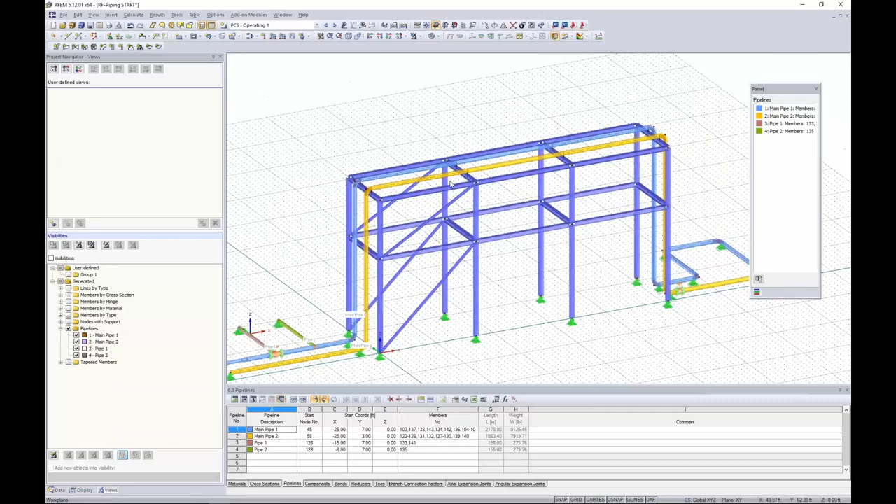So now we'd like to move on back under our Data tab. You can see here our long list of add-on modules, and in particular we'd like to be in the RF Piping Design. Any one of these modules you can right-click and choose it to be your favorite, to move it up to the top of the list. So we're going to launch RF Piping Design, design of piping. This is just a simple dialog box - those of us familiar with RFEM will see this module looks like all the rest of them.

So what we'd like to first define here is the pipelines to design. I can simply select my All checkbox, so now we'll design pipes 1 through 4.

Now the standard can also be selected, not here, but back in the General Data tab. So this is a little different than some of our add-on modules - that standard has to be generated within the General Data. We did select B31.1. I'm going to move all of my load combinations to be considered for piping design, so you can see here my sustained and my expansion loads are going to be utilized appropriately within the ASME.

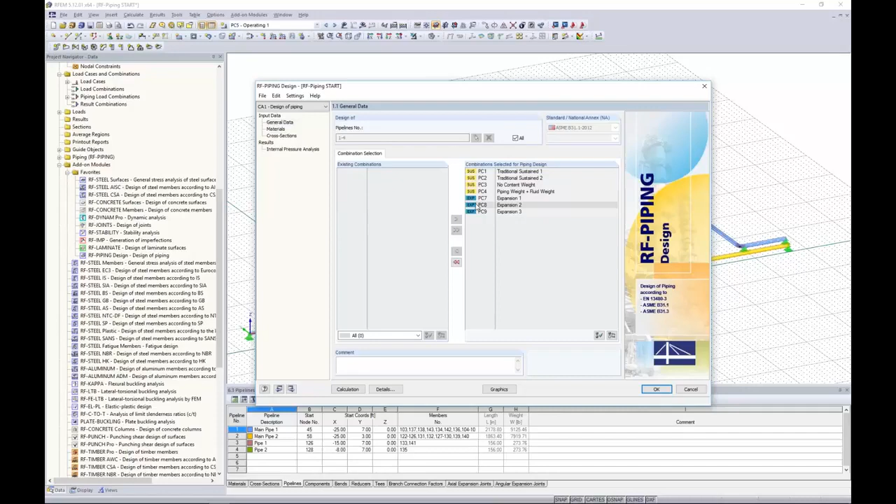Now moving on down the list, I have my materials - this is my A53 brought in from RFEM. I don't have to redefine that. What's further defined are just some of those material properties, if I'm curious to see those again.

Cross-section, same concept. Those are brought in directly from RFEM. I don't need to do anything further with these here. Here are my cross-section properties given to me again.

Now, you'll notice that I actually have results available even before I've run a calculation within the program. This is checking our wall thickness and our pressure, doing a couple checks from the ASME, all without running a calculation. So how is this possible?

Well, for this, I want to jump back to the PowerPoint. This section within our RFEM add-on module is called Internal Pressure Analysis. It refers to ASME B31.1, section 104.1.4. This allows us to check the minimum wall thickness for pressure and temperature. That's what these equations given within the standard are, equations 11 and 12 at this section.

Now there's 2 equations here, so we have some variables we're looking at. The first variable, P, is going to be referred back - remember when we created our cross-section and I said, well, let's give a design pressure here. So this is what I'm telling the program: I plan to design this pipe for 500 psi or less. That value, this design pressure, is going to be utilized within these equations, P.

Now we also have some other variables, capital D sub naught, that's going to be our outer diameter, and then we have smaller d, which is going to be interior diameter. So that's why there's 2 separate equations here.

We also have SE, which just refers to the max allowable stress based on our material for our particular pipe. We have a couple other variables, W and Y, which is the weld strength reduction factor and the coefficient directly from the standard. Both of those are dependent on temperature. So again, this is why we defined a design temperature, because these coefficients may change as well as some other parameters depending on what our design temperature is.

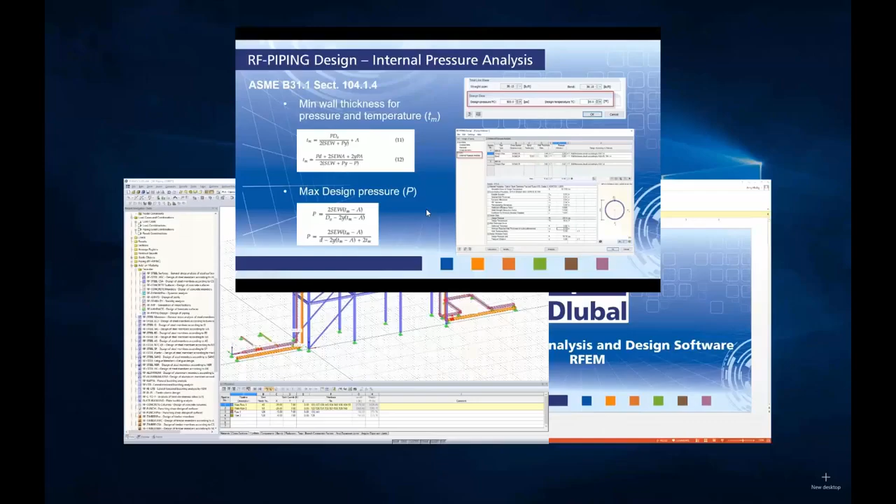So we cannot exceed this max design pressure, which will double check that to what you have entered in here for your cross-section parameters. So those checks are going on here within RFEM, our add-on module, before even running the calculation. You'll notice here I have both my 8-inch section and my 6-inch section. We will check it for both the straight pipe and the bends, because there are different checks for bends as well. We give you the code references.

So here you can see the wall thickness check, we have a ratio for that. We also have our design pressure check. So we will check both of them for you before running that calculation.

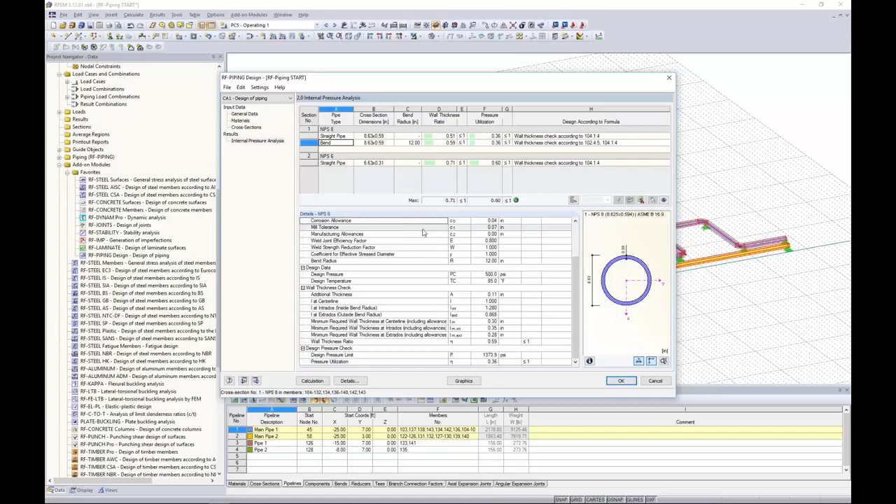Now, before moving forward with the rest of these stress checks, I want to visit the details button here, which brings up our additional detail settings. So most of this is just some further details that we specify according to the ASME, such as the number of thermal cycles. Now, we always give a code reference here, so you can quickly look that up in the ASME B31.1 to understand, well, what exactly am I setting here?

The occasional load factor K, you can see here we have some different settings. 1.15 is going to be used for loads acting for less than 8 hours and less than 800 hours per year. 1.2 would be used for less than 1 hour and less than 80 hours a year, and 1.0 would be the most conservative. We use 1.15.

Corrosion allowances, we have two options with this. Those corrosion, mill, mechanical allowances can either be applied to the stress calculations according to the standard, so whatever the ASME tells us to apply it to, or to all stress calculations, which, as the program tells us here, is a more conservative approach.

A couple more stress options - again, we can just refer directly to the standard to take a look at these. We'll leave them as default. Something recently added is hoop stress, calculated using either the inner diameter, but you can see that we also have the drop-down box to use the mean diameter or outer diameter.

We'll just leave this as inner diameter. Now that we've defined those details, we can move forward with our calculation to see if everything will hopefully work okay this time. Running through both load cases and combinations, we should be seeing results here, and yes, we do.

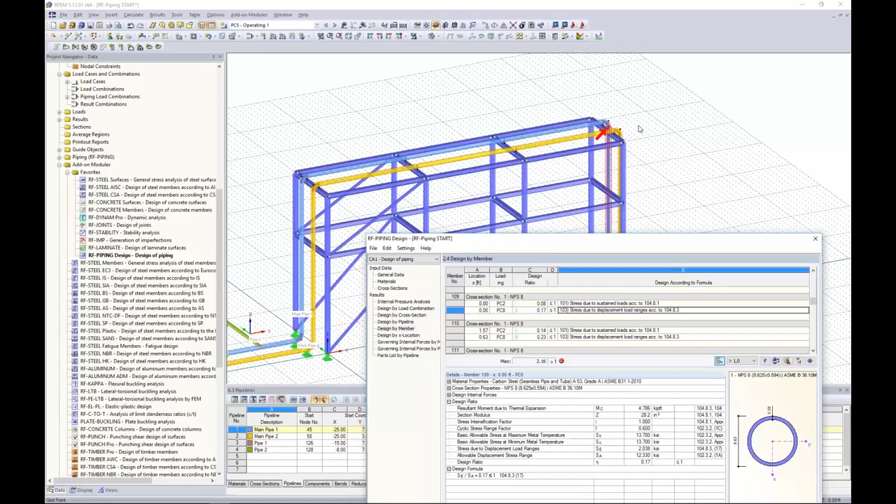Moving back to my design by member, you'll notice that as I scroll through this table, if I drag it down here, in the background the RFEM graphics are synced up to my table. So I can see exactly what stress check I'm looking at. This big red arrow will show you exactly where the controlling internal force for that particular stress is located. In our model today, not so helpful, but with a very large model this will be extremely helpful if you're looking at a big giant table and want to get an idea of where you're at within your structure.

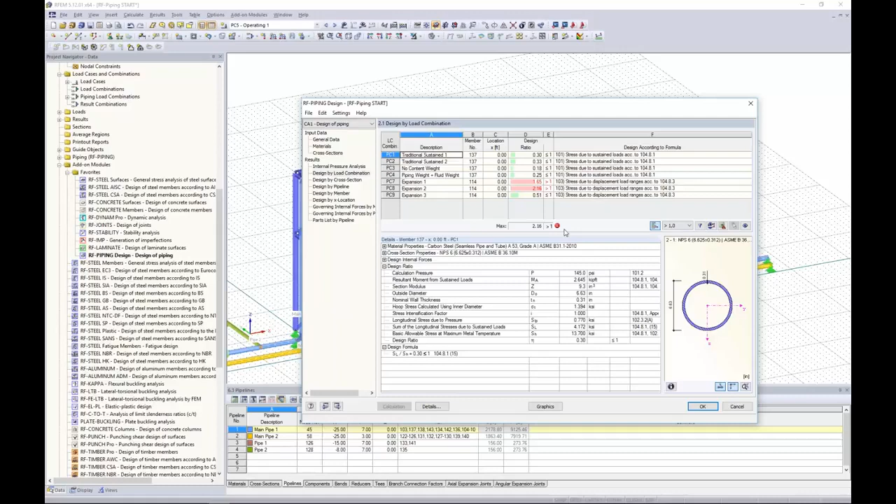We also have parts list by pipeline material takeoff. So when we go back to design by load combination, you'll notice here we have some red numbers, and I have a big red sad face because I am above 1.0. So there's obviously something I need to address in terms of my temperature stresses and the stress checks related to the code.

So the tables are nice, but I'd like to move into the graphics back in RFEM to see exactly where this is occurring. We can choose the graphics button here. Now when I go back into RFEM, I'm technically still in this add-on module. I'm just viewing the results graphically back in RFEM, and you can see this with our drop-down box here.

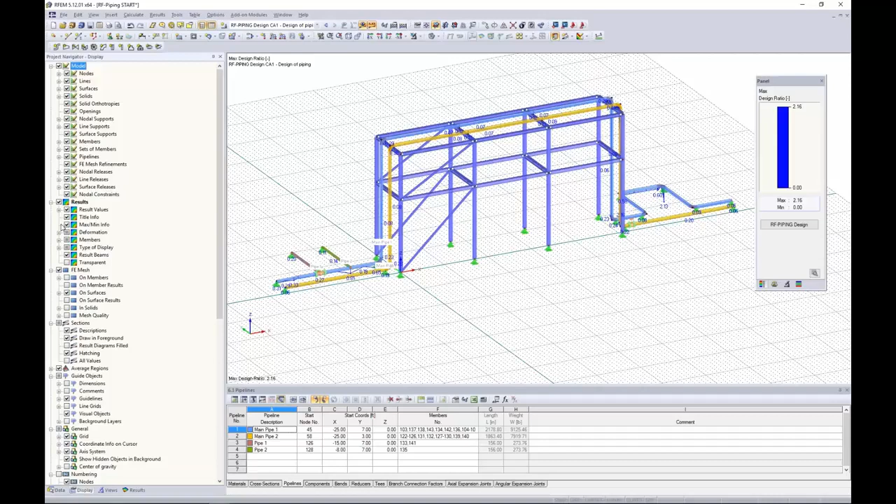Right now I'm showing the design ratios along the pipe members. I can't really see what's going on, but remember under the display tab, everything we view here graphically is controlled within our display project navigator, even the results. Under the results tree for members, I can change this to a few different options, one being cross sections. Now I have colored cross sections I can scroll along the pipes to see exactly where my problem occurs. It looks like these two bends here are a big problem when it comes to our temperature loads and stress designs. So I need to do something with regards to that.

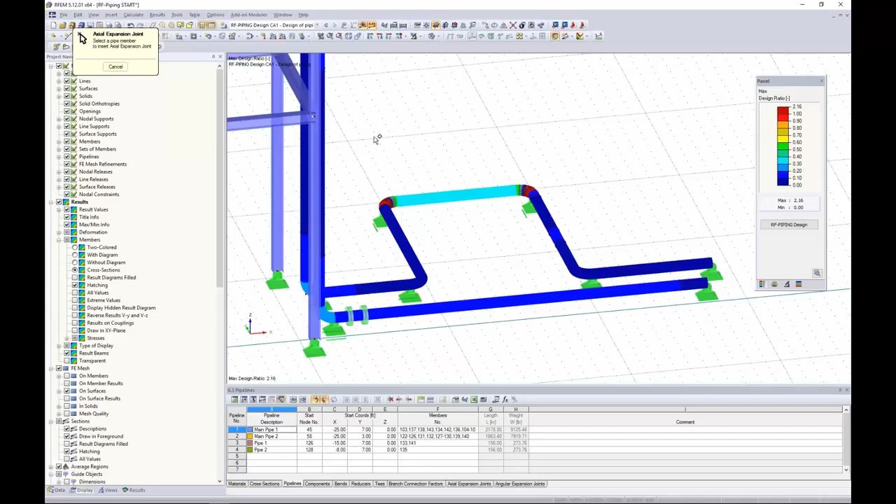That's where I mentioned we would go back into an expansion joint. Although I'm still technically in this piping module, just viewing my results, I can still make changes in RFEM because I'm still concurrently in RFEM. So what we're going to do is add a new expansion joint. I just need to select the pipe I'd like to apply it to.

This looks like the other dialog boxes we saw with our components. Here's where we add in a distance, or we'll start off with the start location. We'll start this off 12 inches from the pipe start, indicated by that red X once more. The length will be 12 inches as well. The outer diameter of my expansion joint is just some geometric properties we need to define, and the outer diameter will be 10 inches. The corrugated length—all of this is given in this nice little picture here, so I don't have to guess what variables I'm putting in—the corrugated length will be 10 inches.

Now the effective cross-sectional area. We have a details button here, and we can either define the outside diameter, the inside diameter, calculate the mean diameter, or directly type in the effective cross-sectional area. For me, I'm going to assume the mean diameter is 8 inches and click OK. Our effective cross-sectional area is automatically calculated. We do need to give it a mass of, let's say, 20 pounds, as well as an axial stiffness. For this, we might get the information from the manufacturer that it's 150 pounds per inch.

The pressure force is the thrust force due to the internal pressure within this expansion joint. Here we have both options for the start and end of the expansion joint. We can apply the entire force, just the bellow—which we can see in this graphic update—or no force at all. For our case, we'll leave this as entire force.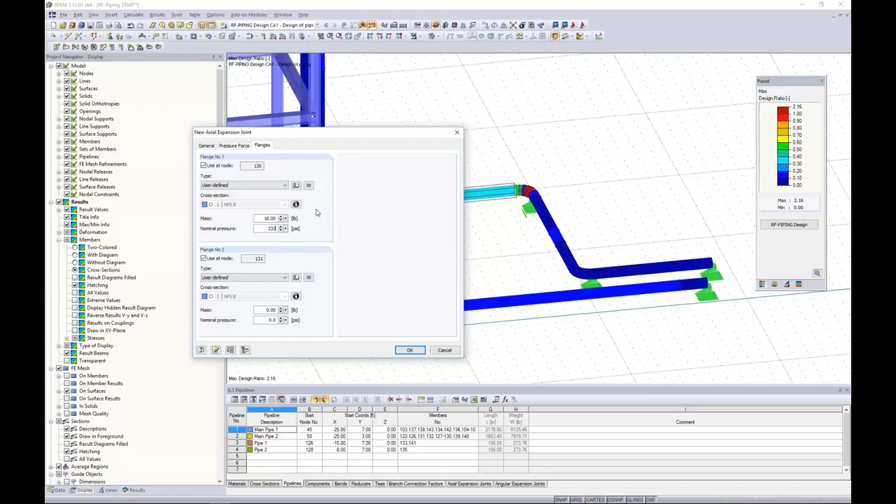Now for the flanges, I want to apply our general flange of 16 pounds, 232 psi, to both nodes. Once I click OK, it'll ask if I want to clear my results. That's fine, and here is my expansion joint that was just generated.

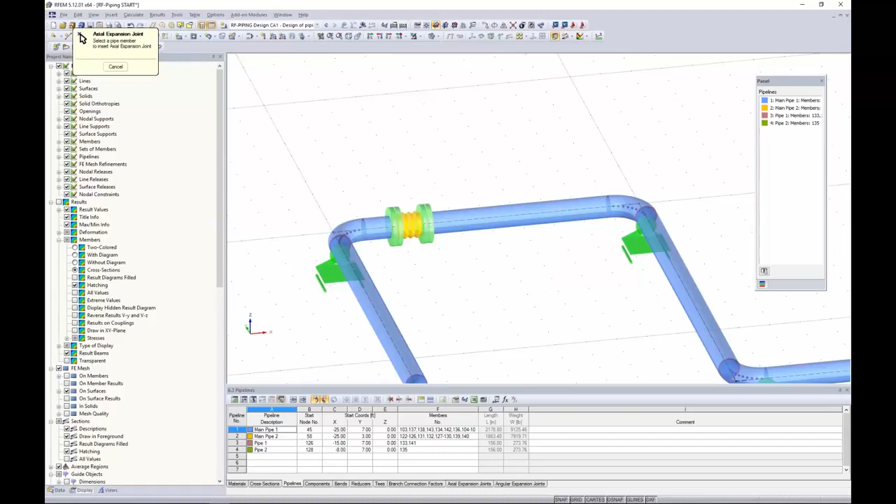Now, it's quite common for expansion joints to be added in pairs—it's not so common for them to be added individually. So maybe we want to quickly add a second expansion joint. We'll add that to this new piping member that was created here.

Everything is the same except now I want to choose to start at 12 inches from the member end. The length will once again be 12 inches, the outside diameter is 10, the corrugated length is 10, and my mean diameter is going to be 8 inches. The mass was given to us by the manufacturers as 20 pounds, with a stiffness of 150 pounds per inch.

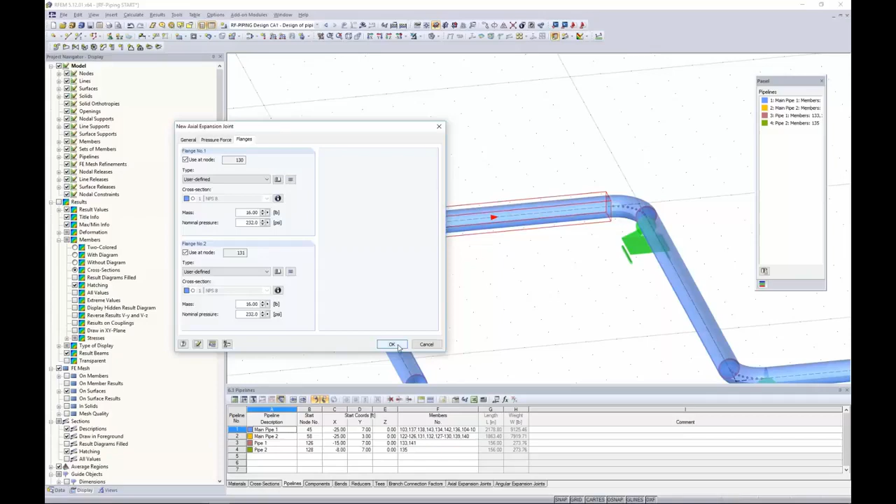For the flanges, we will apply our 16-pound flanges, 232 psi, to both nodes and click OK. So now we have our second expansion joint added here.

So what we'd like to do is rerun those calculations back in our piping module. Right now our drop-down says we're in RF Piping Design. I can always go to my add-on modules and select my current module since that's currently selected, and we'll rerun our calculation here. This cycles through the load case combinations, now with those expansion joints added.

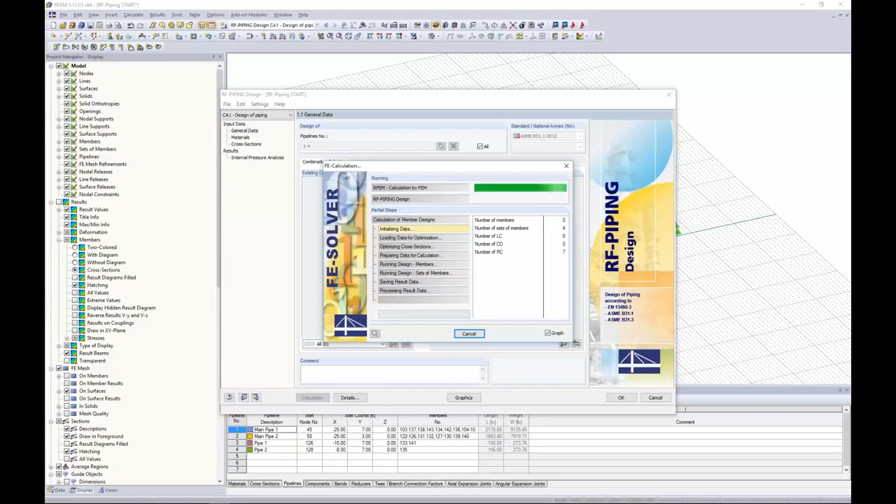So now we can see here that the overall code check was decreased significantly. By adding in those expansion joints, we've decreased the stresses in those bends. Keep in mind, if I make any changes to the cross-section or the design pressure and temperatures of my cross-sections, I probably want to go back and double check this internal pressure analysis to make sure everything is checked—these are two separate checks.

One additional thing I want to point out that I think is really strong with our program versus others is that for all of these checks, we give you all the code references along with the variables. For example, if we look at one of these expansion checks, in our additional information down here we have all the variables that went into play along with the code references for those variables and how they're calculated—remember, stress intensification factors and things like that. The design formula is even given down here, according to section 104.8.3, equation 17.

We can even expand some of these trees here to get our design internal forces and cross-section properties. We want to be very clear to you as a user where your numbers are coming from rather than being a black box. You can always export all this design information back into Microsoft Excel for further sorting as well—pretty powerful in terms of our data output.

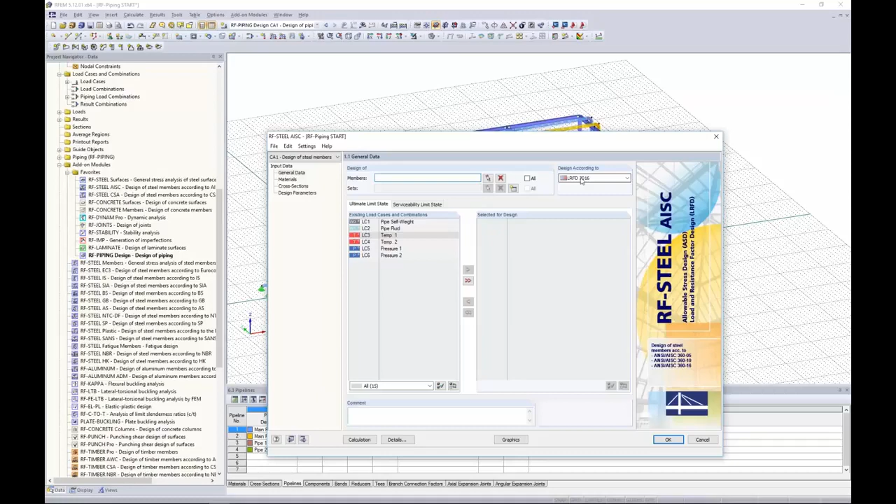This add-on module looks identical to what we were just using with the piping members. So again, once you learn one module, a lot of the modules are set up the same. We could design according to the AISC 2016 standard if we choose to do so. The point being that you can design both the supporting structure and the piping members all within one model, so you can take into account that interaction.

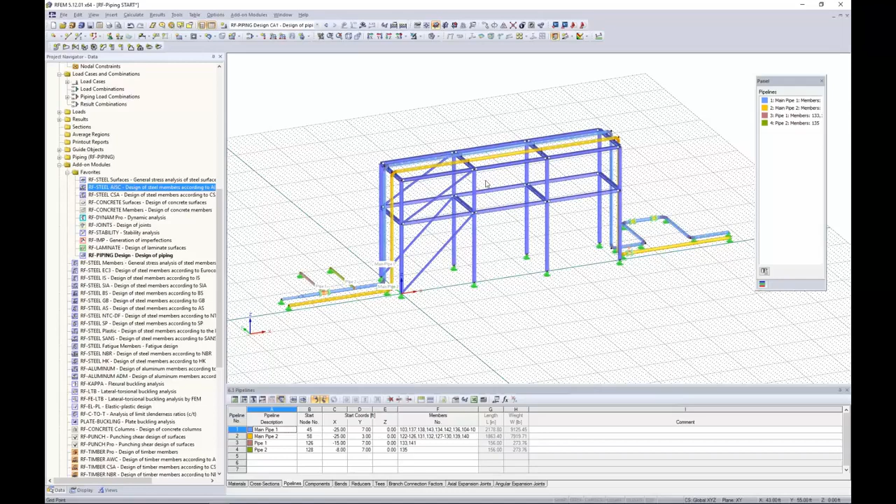I do have further webinars that go into much more detail on only steel design, for example, and you can find those on our YouTube channel or on our website, so I won't have time to get into that today. Now, lastly, I want to touch on our printout report.

So let's assume we have these loads that we've applied to our piping members, and we'd like to quickly add a picture of this to our printout report. We're ready, we've done the design, we're ready to submit these for review. Well, we have this nice feature up here to print a graphic.

Typically with print a graphic, you would have to individually change your load case, print it off, come back in RFEM, change it, print, and so forth. We have an option called mass print. Under mass print, the program has already populated what I'm currently looking at, assuming that I want to print this off. Now with mass print, I can select to print off all load cases and combinations, so I'll get a view of all those different loads printed off at once.

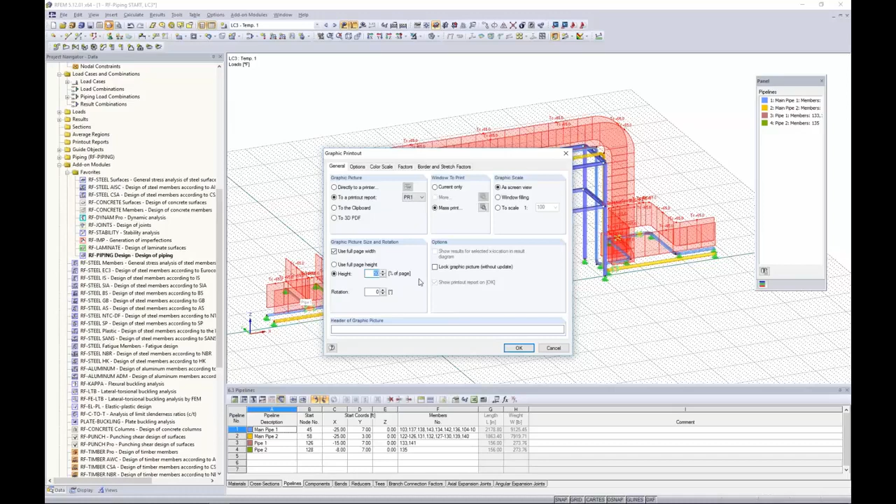I'm going to use 50% of the page height. That's great, I click OK. Now the program is saying, okay, you haven't created a printout report yet, so let's set up a template. So I click OK with that.

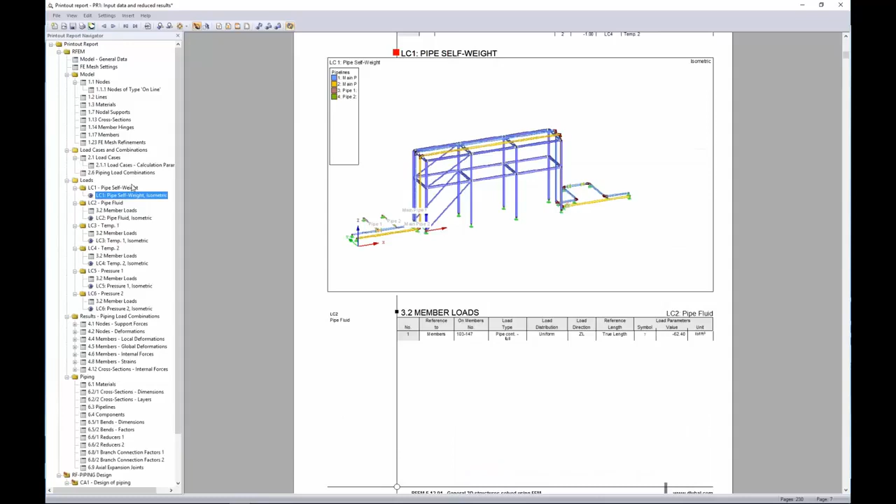Now the program will automatically jump into an additional application here that shows our printout report. With the printout report, we have our table of contents over here on the left, and there are the pictures that we just printed off. They're allocated into the correct location, so they're automatically put into this loads section, and now I can scroll down through. I can see my pipe fluid added here along with my table, temperature 1, temperature 2, and so forth.

And if I ever decide I don't really love the view of this particular picture, I can always right-click to edit it, and maybe zoom in here to just the section I'm most concerned with. I click back. Now this printout report, and in particular that picture, will automatically be updated to show that new view.

Something else that's extremely powerful is that these pictures are all synced up to our current RFEM module, or our current RFEM file. So if I were to go back into RFEM and make any changes to these loads, the pictures will automatically be updated when I come back into the printout report, so I don't have to worry about reprinting those.

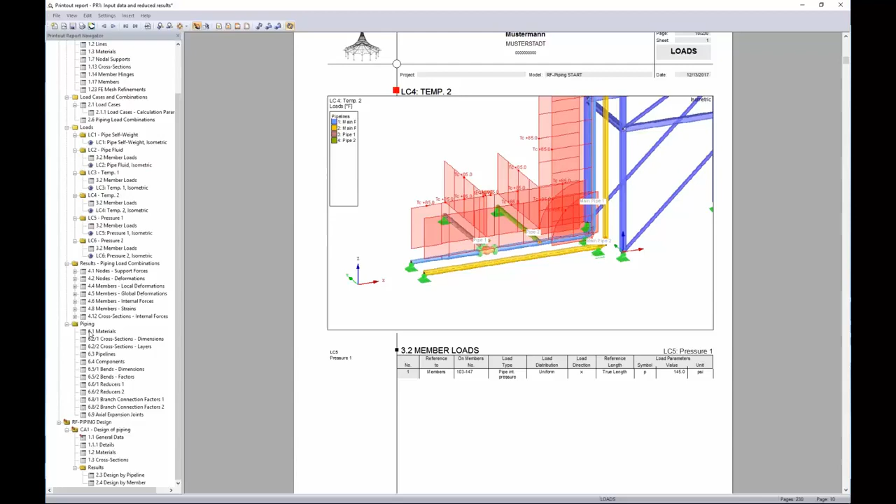As you can see, we have all of our input data for our supporting structure from RFEM, which would be our pipe rack, and then we have our input data for our piping system, including RF Piping Design. So if we scroll down to RF Piping Design, remember I'd shared that we give you all the code references, all the variables, all the design internal forces. Not all of that has to be printed out. You can see here it's nice and short and sweet. We give you the controlling code reference, the controlling ratio, and that's really it.

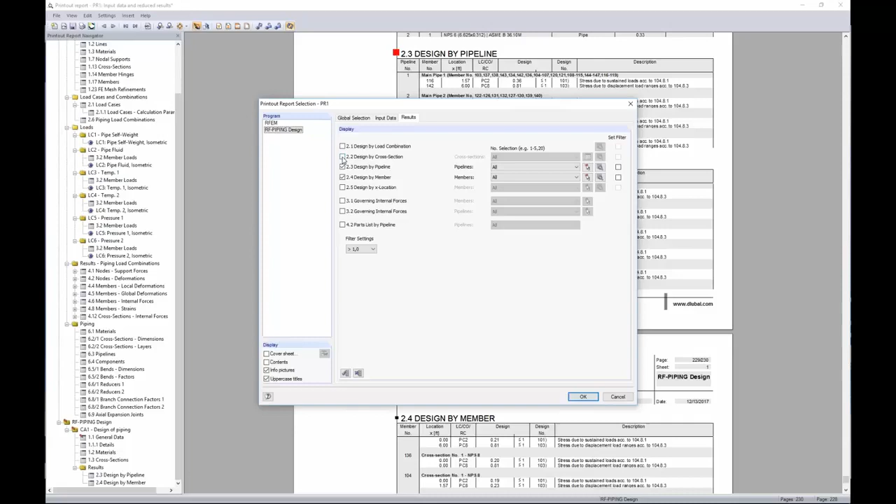But if you want to add more information, maybe this isn't complete enough for you, under Edit, Selection, for example, here's both RFEM and RF-PIPING Design. This is where you can uncheck and check boxes all day long to make it catered to what you want to include in your printout report. You can also save templates and use those on additional files, including adjusting your header and your own logo. So quite powerful when it comes to our printout report as well.

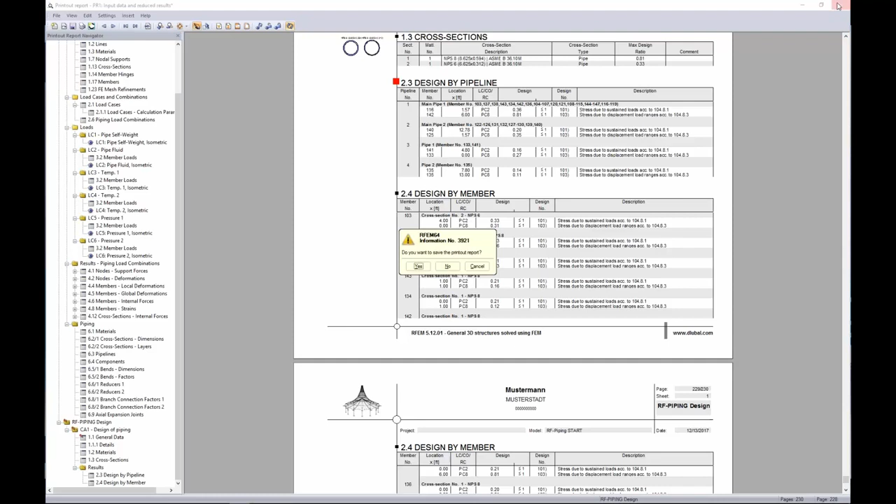Okay, so that concludes our webinar today. So I will continue on with our PowerPoint. That was, of course, so much information within the last hour.